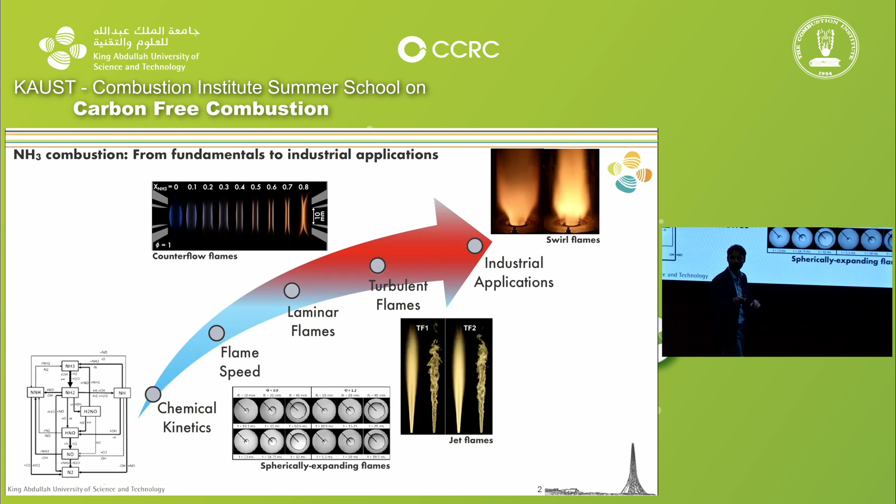I've chosen to separate this lecture into 2 parts. The first one is basically on how ammonia's chemistry influences the way the flame looks, because it is important, and also how it influences the tools we can use to study it.

I'll talk again about the species that are relevant to ammonia chemistry. Of course there will be some overlap with what has been told before. More details on the role of electronically excited species, and what are the challenges and opportunities for optical diagnostics.

And I'll give one example of a measurement campaign we've done at KAUST to reveal the potential of chemiluminescence, so flame spontaneous emission, to do flame sensing in the industry.

As a second part, I will talk about what I said before, all these canonical flames that we do in the labs to try to bridge the gap between very fundamental flame property and chemistry and practical applications.

First, I will show why laminar flame speed, laminar burning velocity — just different terms for the same thing — is not telling the whole story. It's very useful to know, but that's not enough.

And then I will list a few examples of these canonical burners, canonical flames that people have been studying to understand how we can then, in the future, do practical applications.

Moving on to the first step: what are the species relevant to ammonia chemistry? Just a quick reminder, because Professor Kobayashi talked about this, but in this presentation I will often start to talk about methane, which we use as a very simple reference fuel, to then compare with ammonia.

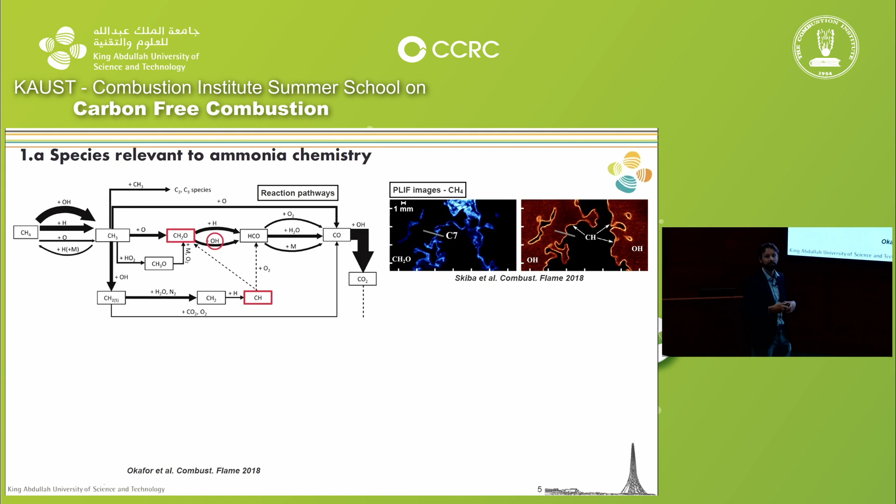If you mark where CH is, you get to know where the flame is actually burning. People have been using this in labs to try to study the instantaneous structure of turbulent flames, to understand turbulent flames. And if you use techniques such as planar laser-induced fluorescence, which Professor Aldén this afternoon I'm sure will talk a lot about, you can image instantaneously where these species are in the flame.

For example, we see that in blue here, we'll see where the layer of formaldehyde is. This is where the preheat zone of the flame is. In orange here, we will see where the CH is, which is the reaction zone. And in red, we have the OH. Sorry, I'm not able to show very well what I want to show because this is actually very inconvenient to use.

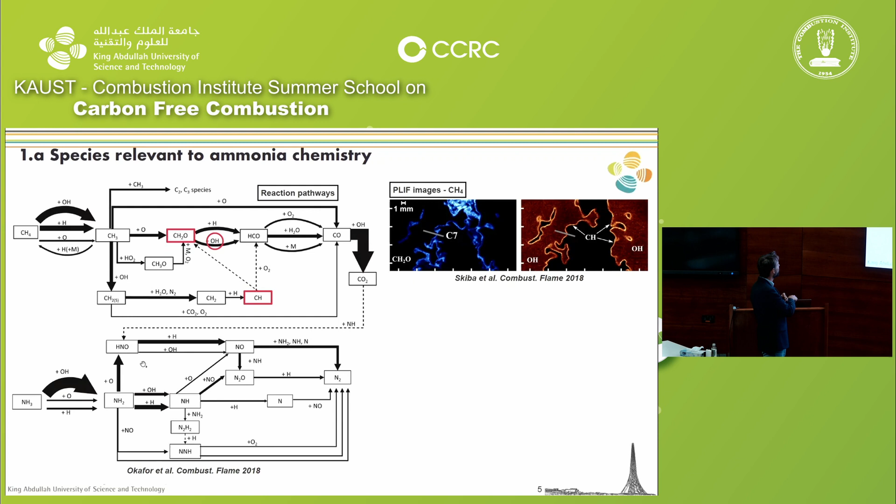But the issue is that with ammonia, it's totally different chemistry. If we look at the similar reaction pathway diagram for ammonia, we look at different species. Ammonia, as it starts to degrade, will form NH2, then NH, and then produce some NO, and with reaction with NO, also will go through to the final product N2. So now if we want to image the relevant species to look at the flame structure, we have to target different species. We can't target formaldehyde and CH anymore, they are just not present.

And so that's why we had to develop different techniques, still relying on fluorescence, but this time on different radicals, NO and NH, to study the instantaneous structure of these flames. So different chemistry not only controls how the flame burns, but it also controls what we have to do in the lab to understand these flames.

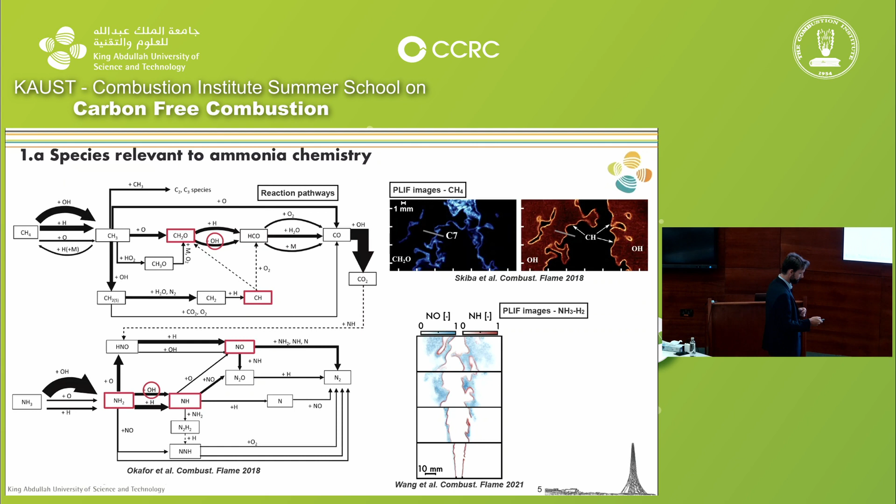Another way to look at the same thing is not using laser, just to look at the flame. I will illustrate this with a basic lab-scale swirl burner. This is a burner that you find in a lab, a few kilowatts, that starts to have a flow field and a complexity that mimics a gas turbine - turbulence and swirl. So this is just an example of such a burner.

And if you use it to stabilize a methane flame, typically you'll see blue flames. From left to right, you have different equivalence ratios, different air-fuel ratios. And at the bottom, you have what you'll see with an ammonia flame. These are real colors, you'll see exactly this with your eyes. And clearly, they look very different. One is blue, one is orange.

We know that these colors are the signature of electronically excited species - species that are at a level of excitation that they don't like. They want to go back to ground state, and to do this, they release photons, light, and this is what we see. Basically, if we have different colors, it means we have different electronically excited species, which means we have also different ground state species. This is just another way of showing that we have very different oxidation pathways between ammonia and methane flames.

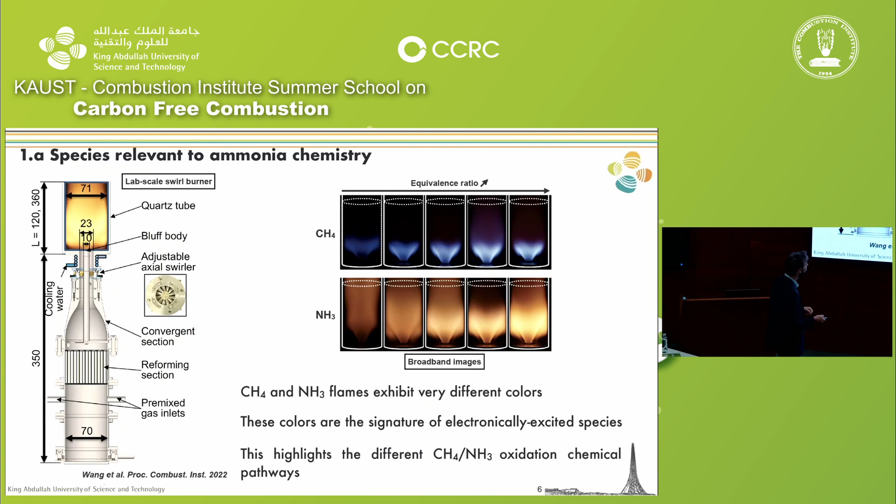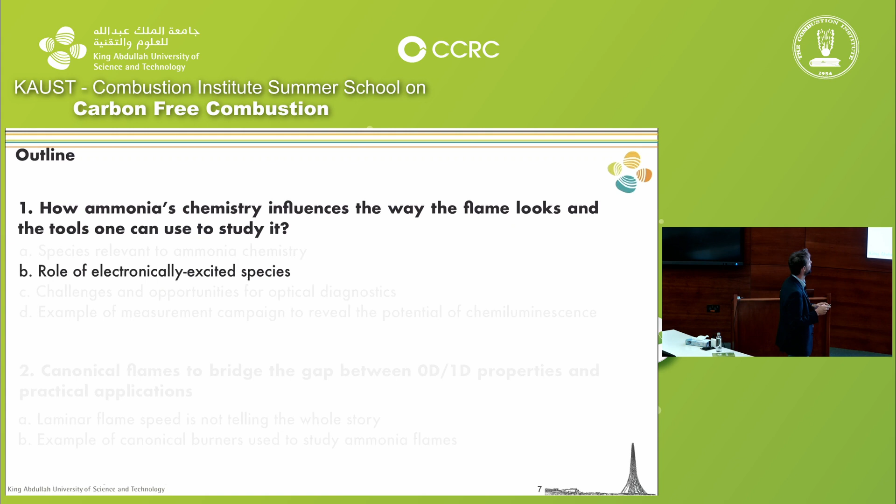And so this leads me to the next section about the role of electronically excited species. Professor Kobayashi started to talk about this, but for ammonia there's a lot of potential application from this. Again, let's go back to a reference flame.

So how can we explain this more carefully? People have been able to model the chemical reactions that explain how these excited species are produced and consumed. These are just examples. For OH star, there's a list of important reactions, and each is assigned three numbers, the Arrhenius coefficients used in this model to dictate the reaction rate as a function of temperature.

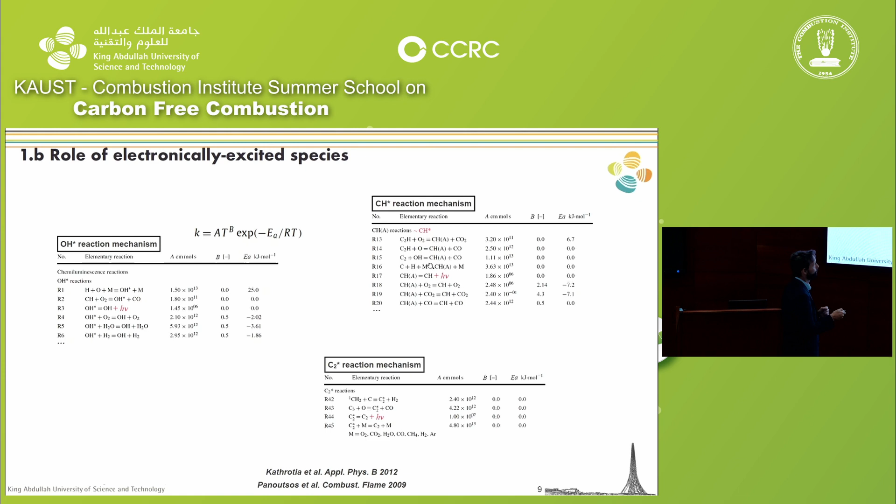So with a model like this, we can explain why we have OH star. But there's a similar model that explains why we have CH star, why the flame is blue, and why we have C2 star. These are just the basics, and this explains why the methane flame is blue.

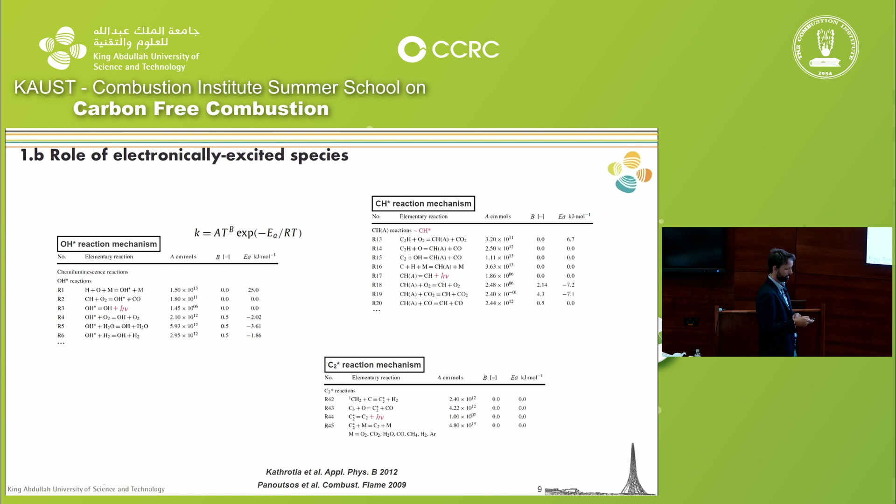I talk about all of this because the light signature of an ammonia flame is actually very rich. Many species contribute to it, and this is actually an asset - it's useful to know this, because if it's rich, it means there's a lot of chemical information coded into it. If you study this light well, you can infer a lot about the chemistry, basically do flame sensing. I'll explain how this can be useful, especially when dealing with complex blends like ammonia-methane or ammonia-hydrogen.

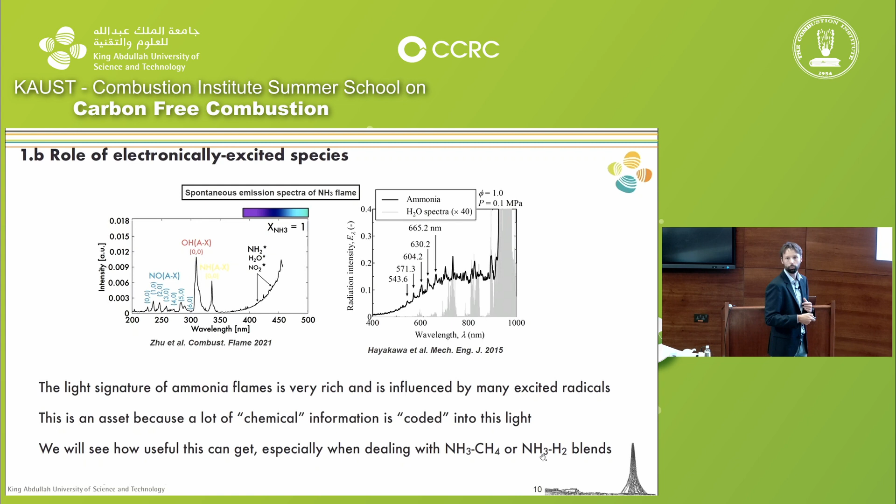So I've started to hint at an opportunity for optical diagnostics. I'll go into this section on challenges and opportunities for optical diagnostics. I think it will be okay for you to tell me why we care about flame luminosity - in an engine or gas turbine, we don't see the flame. Whatever color it is, blue, green, or yellow, what matters is that it burns and produces high enthalpy species.

What's nice about this is that recording the light from the flame is actually very cheap compared to other techniques, such as probes and lasers. And the data you get is quite easy to analyze. The only thing you need to potentially achieve this is some optical access to the flame, just a little hole in your combustion chamber. In labs, that's very easy to do. More complex in practical applications, but it can be done as well.

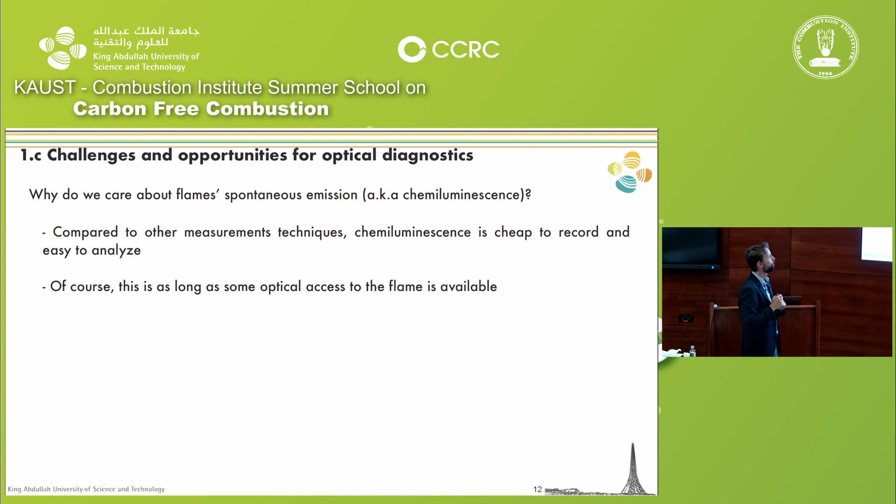So what can we specifically learn from this chemiluminescence, except just saying this is blue or green or orange? To illustrate this, I will use a very simple domestic example. Again, not talking about ammonia for now, but natural gas.

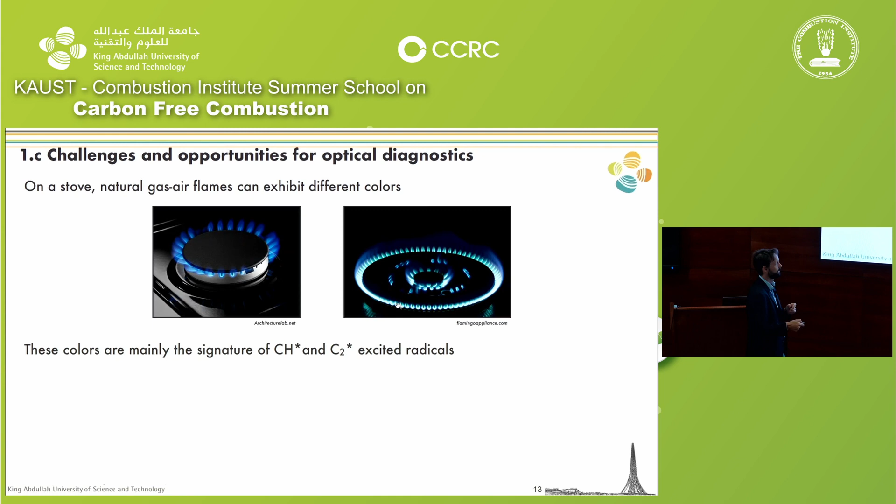Before we all had electrical stoves, we had stoves fueled by gas, potentially natural gas, propane, or butane. If you've seen these kinds of systems before, normally if the system is well set up, you'll see some kind of dark blue flame. But if your system is not well set up, you might be seeing a flame that is lighter in color with a hint of green.

So someone who knows about this, a stove technician, just by looking at the flame can tell you this flame has fuel in excess, you don't want that. Potentially you're wasting fuel, but more importantly, you might be producing carbon monoxide. You don't have enough oxygen to fully oxidize your fuel, so you get CO instead of CO2, and we all know that CO, carbon monoxide, is toxic.

So this is really just a basic domestic example, but you can think that this can be applied to practical devices as well. If you learn from the flame what the color means, you can know if your flame is what you want or not.

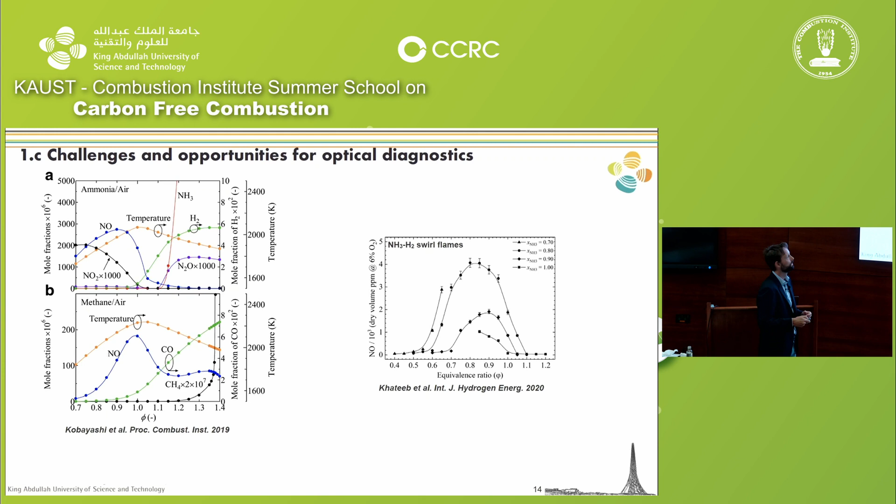But knowing exactly what's the fuel that is burning is also important. You see in a graph like this, measurements of the NO concentration in the exhaust in thousands of ppm as a function of equivalence ratio. But you have different curves here, different symbols, because there are different compositions of the ammonia-hydrogen blend. And we see clearly that changing the composition, even though you're always using ammonia and hydrogen, has a huge impact on the amount of NOx you're producing.

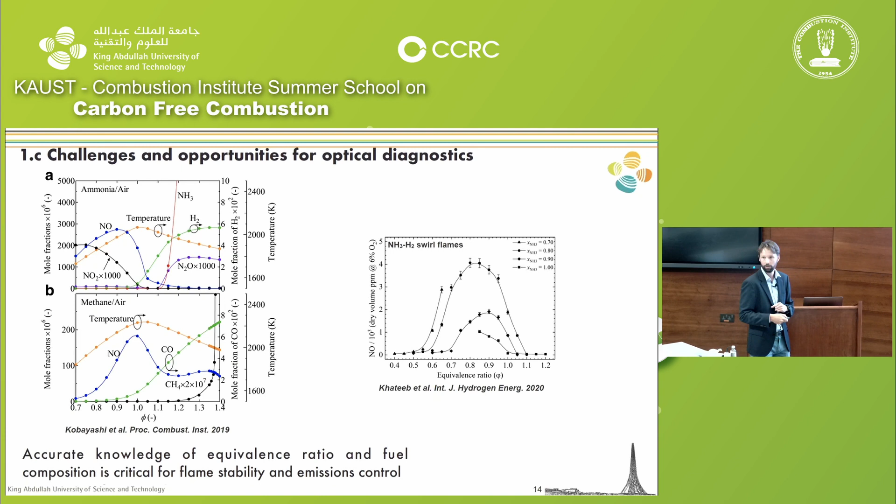So the key of this slide is saying: accurate knowledge of the equivalence ratio and the fuel composition is critical for emission control. And I haven't talked about this, but clearly also for flame stability. So these things are important.

And again, you may be able to ask me, okay, but isn't the operator of the gas turbine or the engine choosing the amount of air he or she sends and the amount of fuel? So aren't composition and fuel-air ratio prescribed and known? Okay, why do we care about this? It's actually because we don't really always know exactly what's burning and how it's burning.

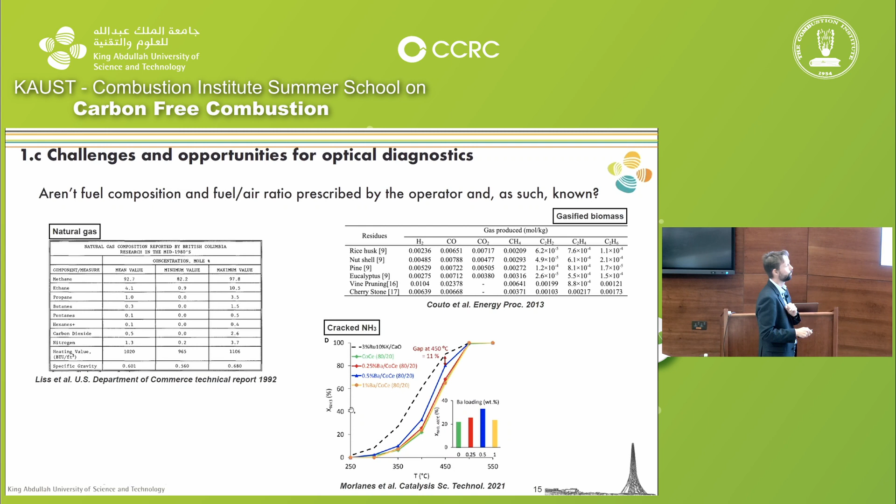A curve like this shows you the cracking percentage of ammonia. So 0 means you've cracked nothing, 100 means it's all converted to hydrogen and nitrogen, as a function of the temperature of your catalyst bed. Different colors mean different catalyst compositions, but that's not very important here. And this curve is so steep that it basically shows that if you don't control exactly the temperature of your catalyst bed within a few degrees, you might have very large variations of the composition of your exhaust gases of the cracker, which is then sent to the gas turbine.

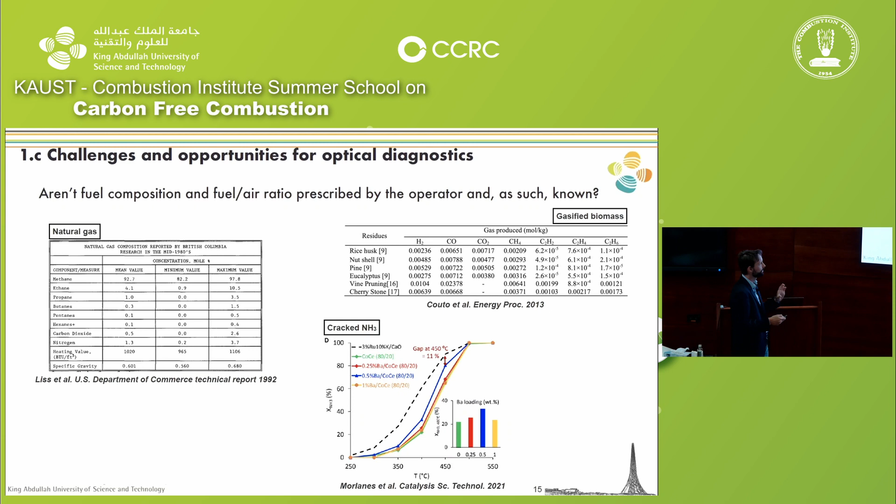Okay, so again, just examples to show that as an operator, we don't always know exactly what we are fueling the turbine or engine with. So temporal variations of fuel composition are to be expected. This was for the fuel composition. What about the fuel-air ratio?

I will illustrate this with the schematic of a powertrain of a micro gas turbine, this one from Ansaldo. I guess those of you who did the lab tour yesterday have actually seen this turbine. So the heart of the unit is the combustion chamber, producing hot products that are expanded into a turbine, creating rotation of a shaft connected to a generator that produces electricity. But in addition, on the shaft there is also a compressor that sucks in air from the room, compresses it, and sends it to the combustor.

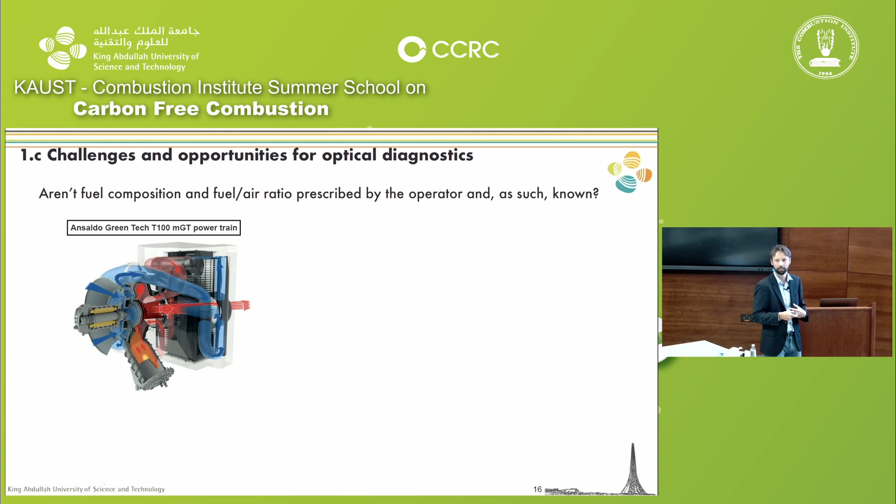Okay, so the key here is that we don't have a mass flow controller where we push a button and say, I want 10 kilograms of air per second. It's kind of passively driven by the speed of the shaft, and it changes with time depending on how the turbine is operating. And it gets worse than this.

Once the compressed air goes to the combustor, this is a schematic of the combustor, it comes from the top here, and not all of it goes into the injection, into the flame. Some of it goes into these dilution holes that are here to make sure that the hot products from the flame are cooled down before they reach the turbine. Otherwise it's too hot and you damage the turbine, right? And here again, we don't have mass flow controllers that set the flow. We just have holes, so it's all passively driven using pressure drops.

It's okay, it's the same, we don't really know exactly what's going to happen. Even worse, once all this air reaches the injector section, some of it goes into a small pilot flame that burns in diffusion mode. Some of it finally gets mixed with the fuel, but we keep some pure air to inject at the very last moment. That's a protection mechanism because we want to make sure it's not flammable until we want it to be flammable. This is a flashback protection mechanism.

When we do this, we really mix all the fuel and air at the very last moment, and we're not sure it's fully premixed. So you might have spatial variation of fuel-air ratio, equivalence ratio, in your combustor. Again, we don't really know exactly what's burning and how it's burning. This is why I'm talking about these flame colors, because by looking at them, we get to know potentially what's burning and how it's burning.

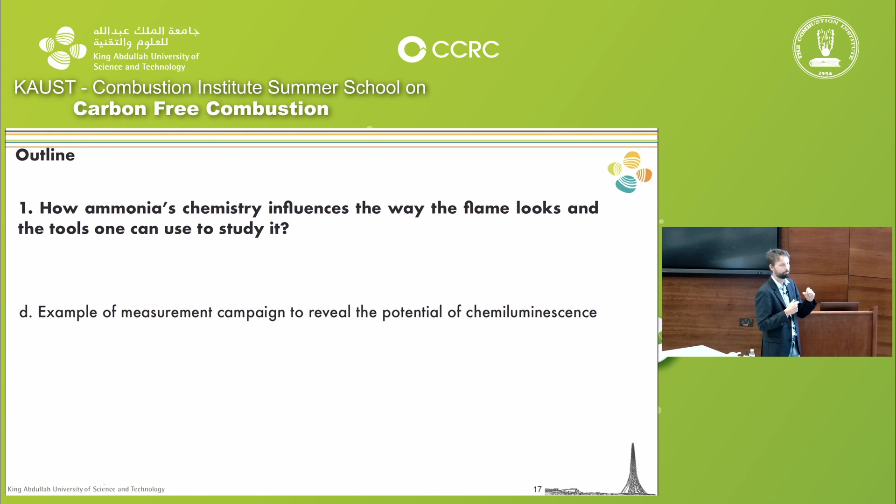This allows me to move to the next section, about an example of a measurement campaign we've done at KAUST to reveal the potential of this chemiluminescence, these flame colors, specifically when there is ammonia in the flame.

The objectives were simple. We wanted to measure the largest possible database of flame luminosity for ammonia-methane flames. We did also ammonia-hydrogen, but today I'll talk only about ammonia-methane. Then we use this database to try and understand how these chemiluminescence intensities, these colors, can be surrogates of important flame properties we want to know, such as fuel composition and equivalence ratio.

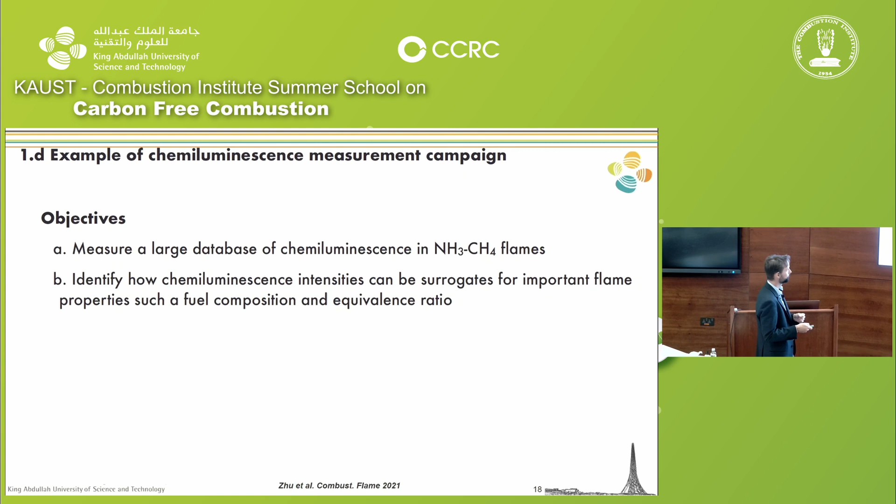For that, we've used a very basic burner mentioned this morning, a counterflow burner. That's a very specific burner in the lab, basically two nozzles facing each other, identical, feeding the same mixture. A ready-to-burn mixture of methane, ammonia, and air is sent to two injectors facing each other, so you get a stagnation plane in the middle, and on each side you get two identical flames, we call them twin flames. What's nice about this burner is that the flames are very flat, which makes them very easy to study and to model.

The small deviation we did from the standard burner is that we pierced a hole at the bottom, so that the light emitted by the flame could escape, be focused on an optical fiber with a parabolic mirror, and then sent to a spectrometer so we can analyze the light distribution from the flame.

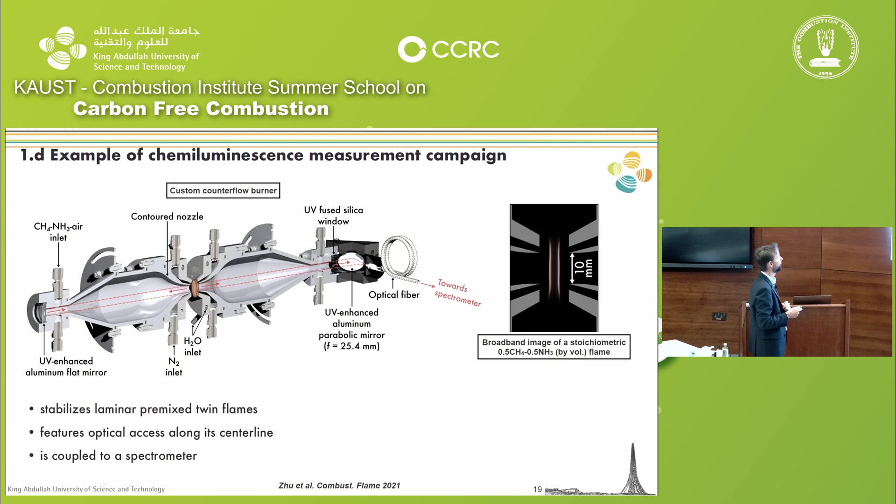We did this exercise for as many flames as we could. This image shows that we varied the fuel composition. The one on the left is pure methane, it's blue. The one on the right is almost pure ammonia, it's orange. You have this whole rainbow of colors in between. These are real colors. We were surprised at the beginning, but other people have seen the exact same thing.

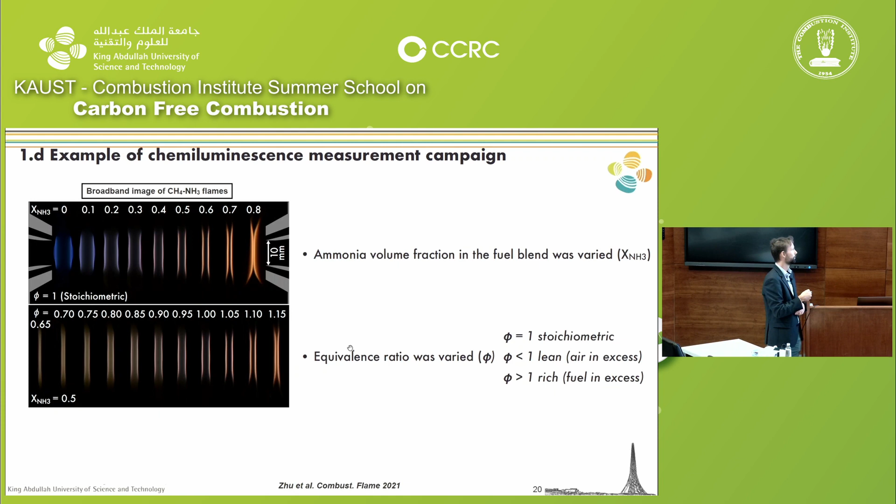We can also, for a fixed fuel composition, vary the equivalence ratio, the fuel-air ratio. We observe that this also changes the flame color and the flame intensity.

For each of these flames, we have a spectrum which we can analyze. I've shown this one or an equivalent before. This is the one for pure methane, with contributions from OH star and CH star. The one for ammonia, also shown, has contributions from OH star, NO star, NH star, and these broadband contributions.

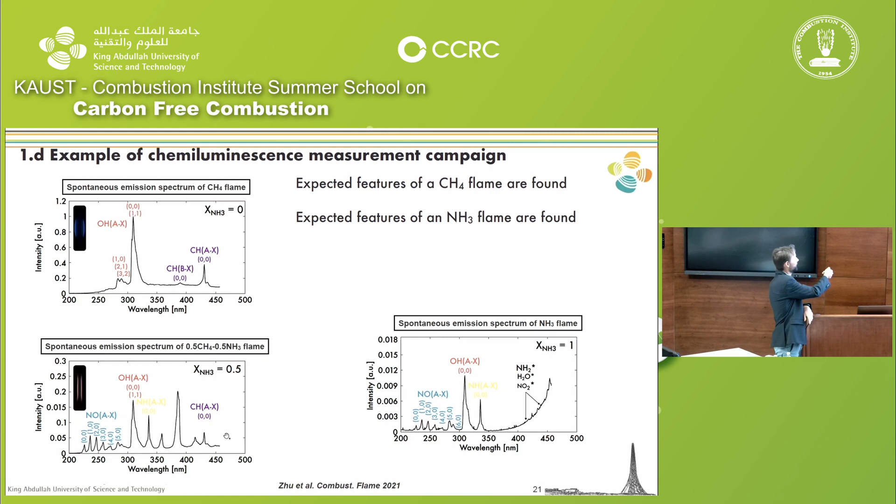Where it gets interesting is when you mix ammonia and methane. As expected, you see some OH star, because it was there for both ammonia and methane. You see some CH star, NH star, and NO star, that's expected. But we do find some peaks that we did not find before. By doing some literature review, we were able to attribute them to the excited species CN star.

Why is this important? It highlights that there are basically synergies between the reaction mechanisms, some cross-contamination. You can't get CN star if you have only methane or only ammonia—you get it only if you mix them together. So this shows that these reaction mechanisms don't work in isolation; sometimes they communicate. This is just highlighted here with an electronically excited species, but if this is true for an electronically excited species, it's also true for the ground state species.

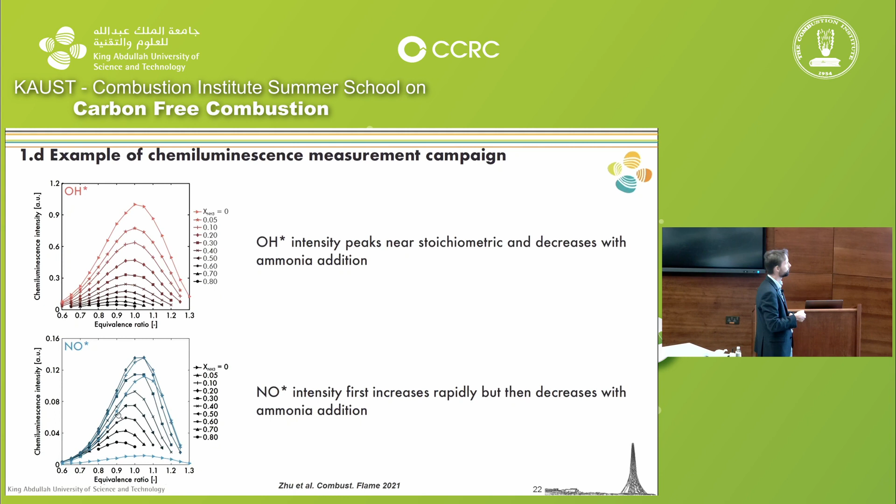Clearly, the more ammonia you put, the less OH star you get. What's nice is that when you look at the same graph but for NO star, we get a very different trend. Starting from pure methane, there's almost no NO star; you put a little bit of ammonia, and NO star explodes. Then if you put too much ammonia, NO star decreases. So we have different trends for these radicals.

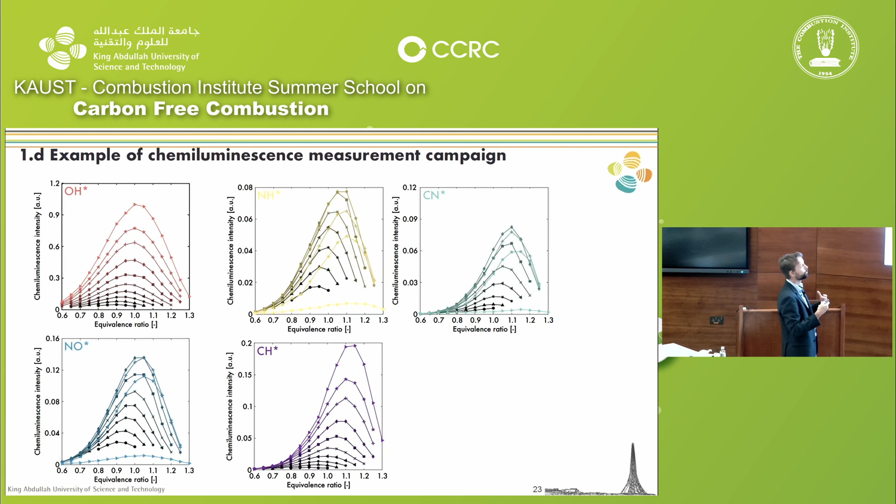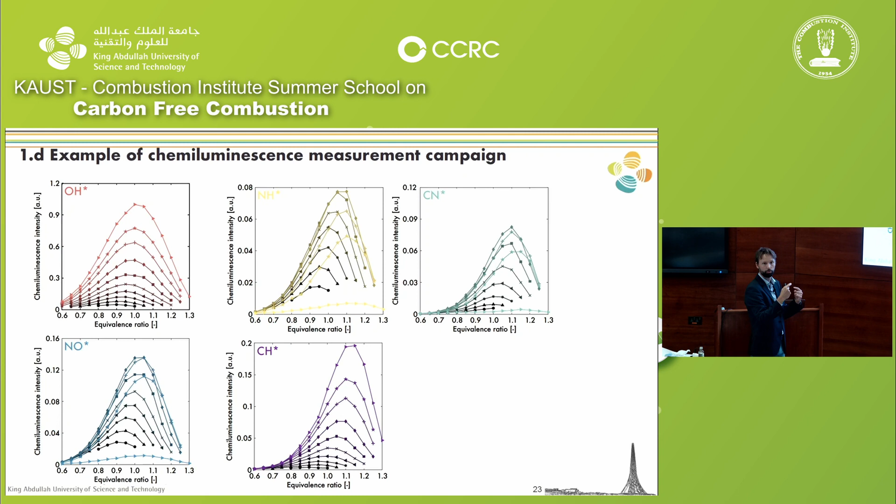And if we look at all the radicals we have access to, they all have different trends. Again, this is very useful, because if they all behave differently and we record them, there's probably enough information in there to predict, to recover what was actually burning.

Except that now we have 5 inputs, these 5 radicals, and there are 2 quantities we care about: we want to predict the composition of the fuel and the equivalence ratio. So this might be quite complex and nonlinear relationships. This is where machine learning regression algorithms can help us uncover these complex and hidden relationships.

So we have this database. In this case, we had 214 flames, and we chose to put 75% aside to train our algorithm, and 25% aside for future validation.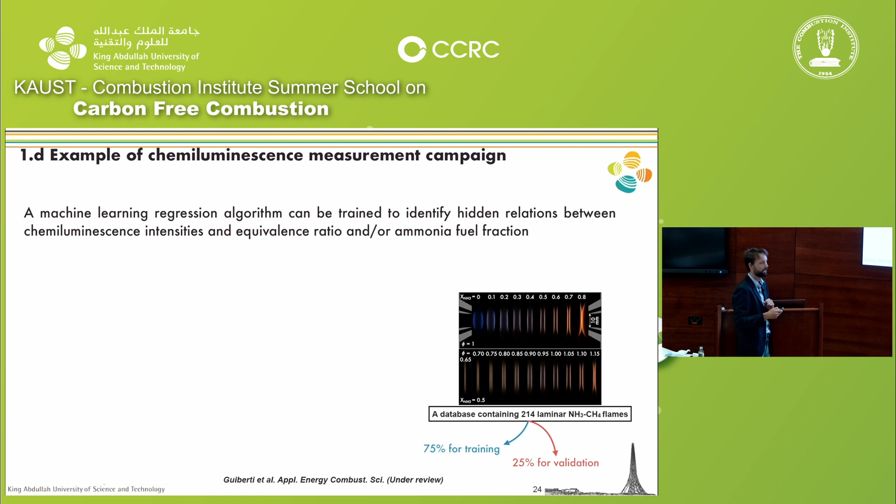So we have this algorithm that injects as input all the different colors from the flame, as well as the equivalence ratio and the ammonia fraction. You want to train it to predict what was the equivalence ratio and the ammonia fraction just by using the different colors from the flame.

If we look first only at the blue points, these are the points for the training data, we show that we are successful on collapsing on this unity slope line. So the algorithm was able to recover what was burning.

But what's nice is that when we now use the 25% of the data that was not used for training, these are the red points, we also fall on this line. So the predictions were successful, which means physically that there's enough information in the light that the flame sends to really predict exactly what's burning in terms of fuel composition and equivalence ratio.

And that's the foundation to be able to say that we can probably use this to do flame sensors in engines or gas turbines. We can do this because this light signature is so complex.

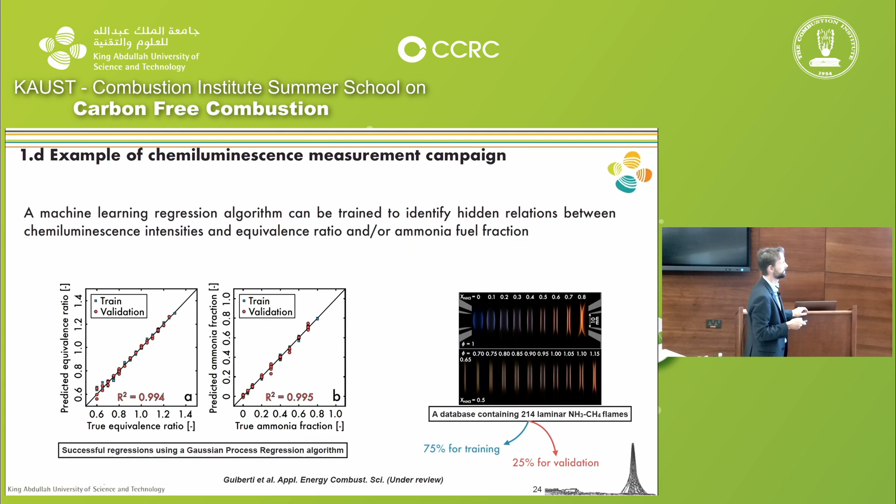The issue here is that we've only done this for these laminar flames, which are very different from what you'll find in an engine or in a gas turbine. And as very often when you do machine learning, you always ask yourself, can this be generalized for other conditions? And other conditions in this context means more practical flames.

So to challenge this, we've done different flames, this time turbulent swirl flames, not quite a gas turbine already, but something that mimics quite well the flow of a gas turbine. That's an example of the flame. So we did, again, methane ammonia.

The other deviation we did from the laminar flame study is that this time we used a bench spectrometer, a much cheaper and easier to use spectrometer compared to the scientific grade spectrometer, with the assumption that maybe in the field, in industry, they would use bench spectrometers instead of scientific spectrometers.

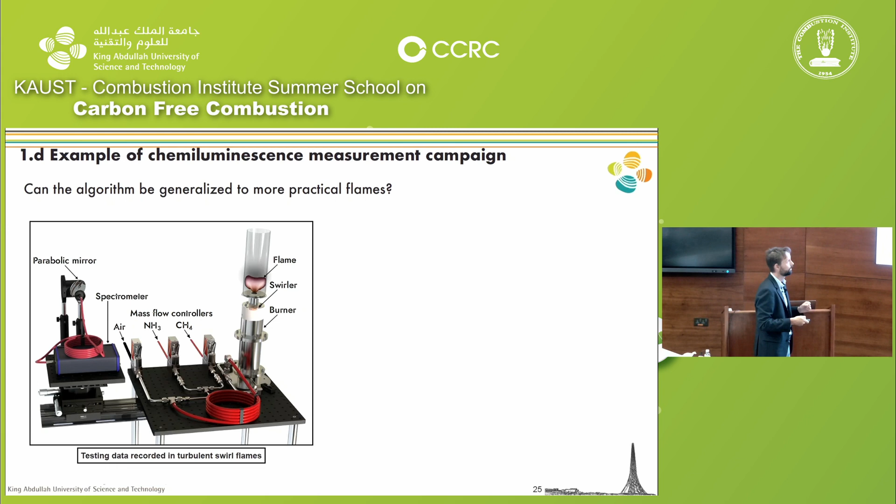We recorded all of this data, and then we sent as inputs the light emitted from the flame into our machine learning algorithm, not telling the algorithm, of course, what was the equivalence ratio and what was the ammonia fraction.

And we found these green symbols, for these swirl flames, that again match very well this unity slope curve. So we were able to predict the equivalence ratio and the ammonia fraction in these gas turbine-like flames with an algorithm that was only trained with laminar flames.

So the story stops here, but it basically shows that there should be enough physics to develop these flame sensors.

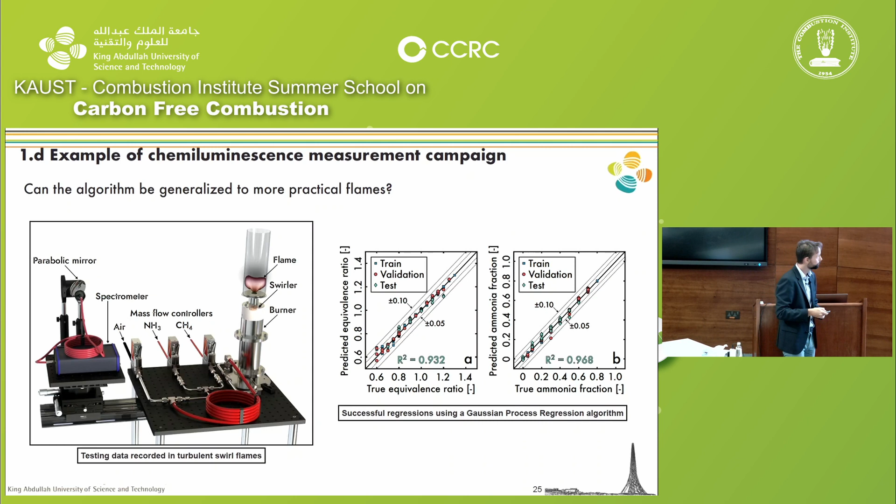So this was basically an opportunity for optical diagnostics thanks to ammonia, but I haven't talked about the challenges yet, so I'll backtrack a little bit and talk about some challenges.

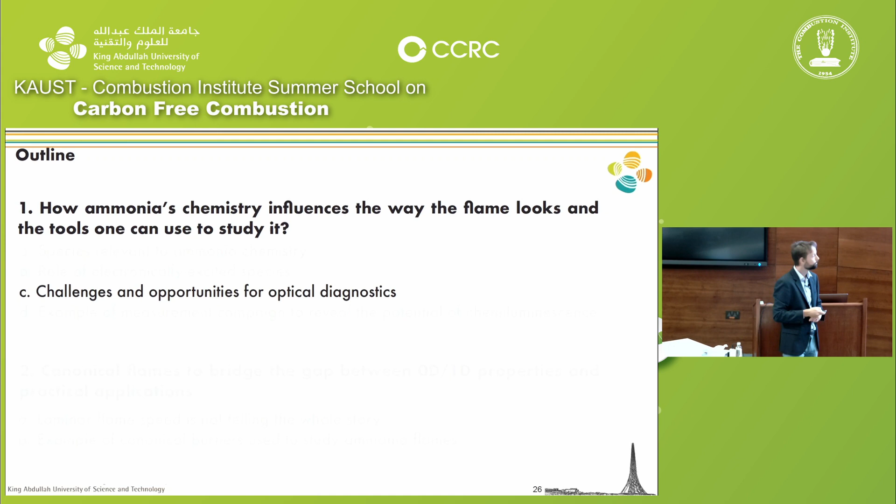If you want to image in a lab the structure of a turbulent methane flame, it's useful to image formaldehyde, OH, and/or CH. Unfortunately, you can't use these same species in an ammonia flame because, except for OH, they're just not present. So instead you might target NH2, NH, and OH or NO because they have similar behavior. When you do this imaging, you have to choose lasers tuned specifically for each species, so if you have different species, you have to go back to the drawing board and figure out new lasers or excitation strategies.

This is what I'll talk about briefly, since I'm sure there will be much more this afternoon. This is a schematic of the experimental setup we used to do NO-NH laser-induced fluorescence. You have an ammonia flame here, in a big high-pressure combustion duct, because we cared for this study about elevated pressure flames.

You saw this in the lab yesterday. So what we do is shoot two different lasers into this flame, both in the UV, one at 236 nanometers and one at 303. One targets NO, the other targets NH. Why? Because if you want to excite the species to generate the fluorescent signal you record with the camera to measure your species, you need to make sure the species accepts this wavelength—it's tuned to this wavelength, and that's what this diagram shows.

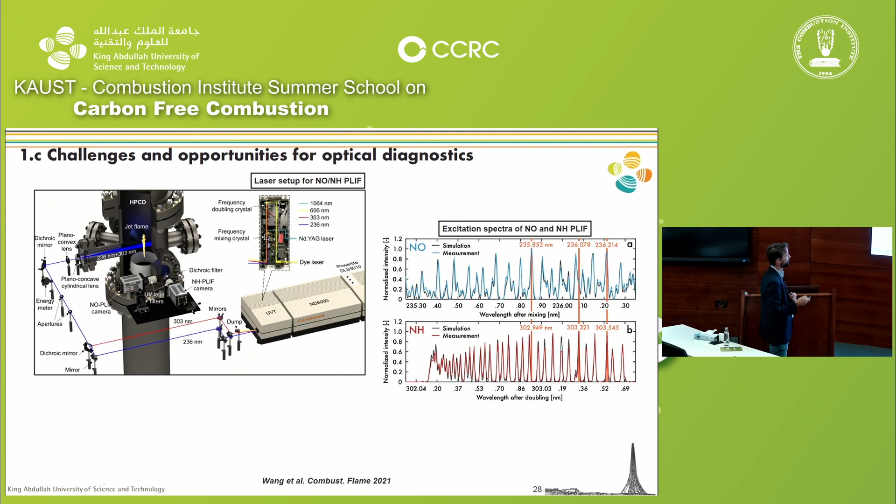Again, I'll be brief since this will be covered this afternoon. This is what Professor Aldén developed at the University of Lund—being able to image NH2 as well. This illustrates that if you want to excite NH2, there are only specific wavelengths you can use to do it efficiently. They had to use very specific laser technology to access this wavelength, 385, with the right energy levels, and they were able to prove you can image the location of NH2 in these flames.

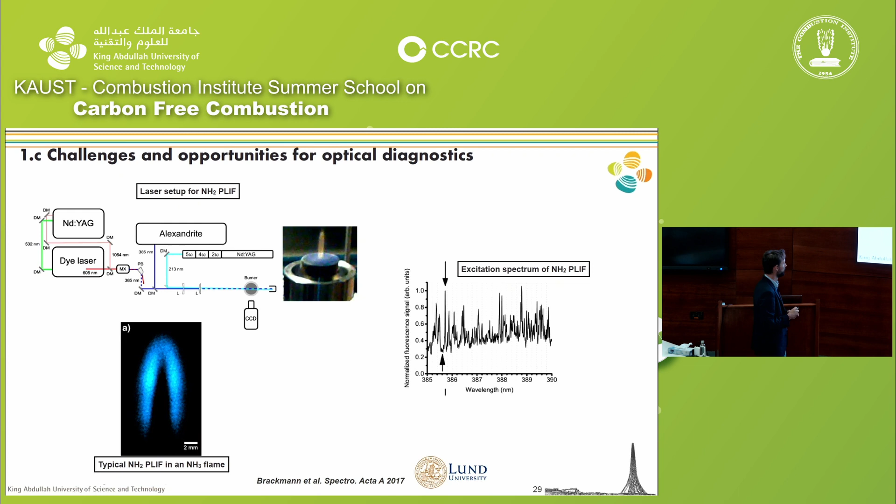All right, so I'll stop here with part one and move on to part two, which is somewhat disconnected. This is about canonical flames that people have used in the lab to try to bridge the gap between what's very fundamental but useful, and the other end of the spectrum with practical applications. There's a lot of limbo in between where we need to work a lot.

I'll illustrate why we need to work a lot on this, starting with why just knowing the laminar flame speed is not enough. There's a very nice study done at NTNU in Norway that illustrates exactly this, which I'm going to talk about. My point is that knowing the laminar burning velocity is not sufficient if you want to predict the behavior of the flame in a practical combustion device.

Among other things, one reason for this is turbulence—the effect of turbulence. The laminar burning velocity doesn't take this into account. They showed this very nicely using a burner, which was very simple.

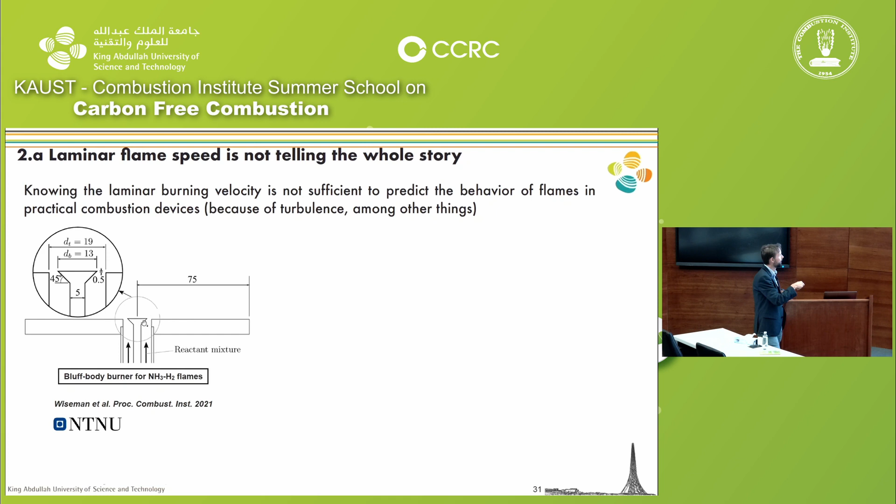And before the injection, it meets this shape here, this bluff body. And this induces a recirculation zone so that the flame is stabilized like this. So on the side here you have the flame front, and in the center a hot recirculation of burn product. This is very useful because you keep sending back to the incoming reactants hot products, so this is a continuous ignition source.

And in an instantaneous fashion, this is what it looks like. You really see that this is a turbulent flame with some corrugation and some potentially localized extinction.

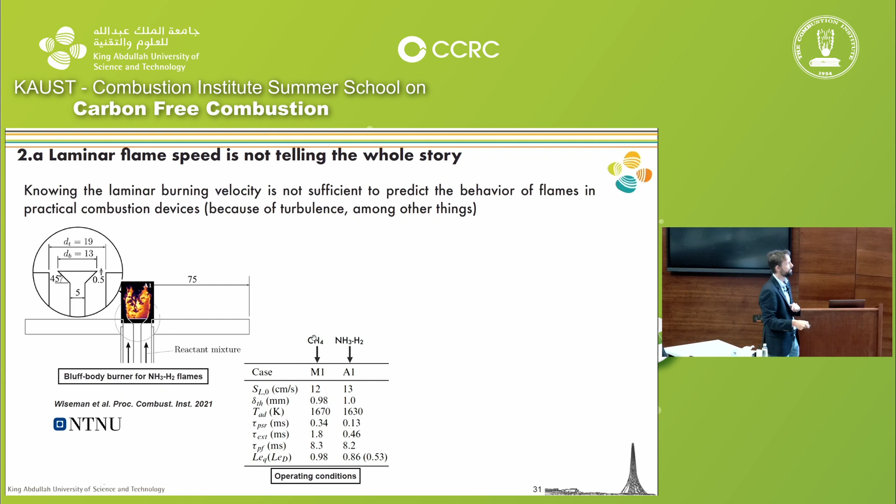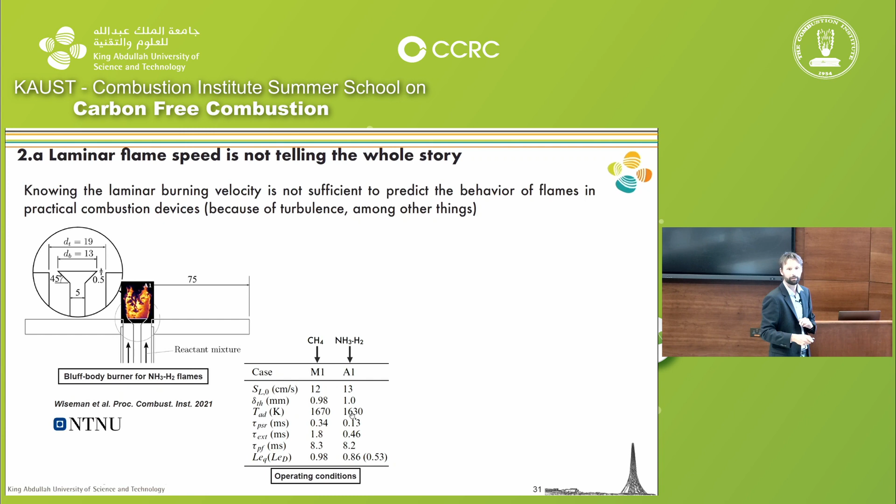So what they've done with this burner that was very clever is that they chose two flames, M1, M refers to methane, and A1, which is an ammonia hydrogen air flame. But they tuned the composition and the equivalence ratio so that they have almost the exact same laminar burning velocity, thermal flame thickness, and adiabatic flame temperature. So in terms of laminar properties, these two flames should be identical.

And then they challenged this in the turbulent burner, and so they looked at lean blowout limits. They started with these flames, which are both—so let's ignore all the points except M1 and A1. Both are 0.6 equivalence ratio, and if you start with very low velocity in your burner, you have a stable flame. You progressively increase the velocity up until the point the flame can't take it anymore and extinguishes. This occurred at around 10 meters per second for the M1 flame.

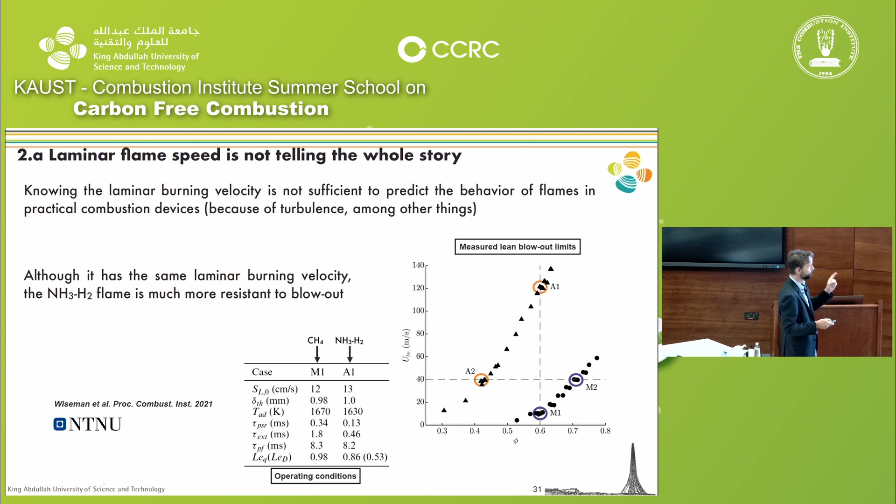And what they've noticed is that if they do a similar exercise with the A1 flame, they could pass much, much larger velocities, up until 120 meters per second. So although these flames from the laminar point of view are the same, one of them, the ammonia hydrogen flame, is much more resistant to blowout. That's a clear indication that even if you know your laminar burning velocity, this is not enough to predict what's going to happen in an actual practical burner. I will explain to you later with a different study why this happens.

And so now we'll go through different studies made in different parts of the world, showing how people can specifically choose a physics they care about, study it with a very carefully selected burner, so that in the end, by adding all of this together, we can potentially do practical devices.

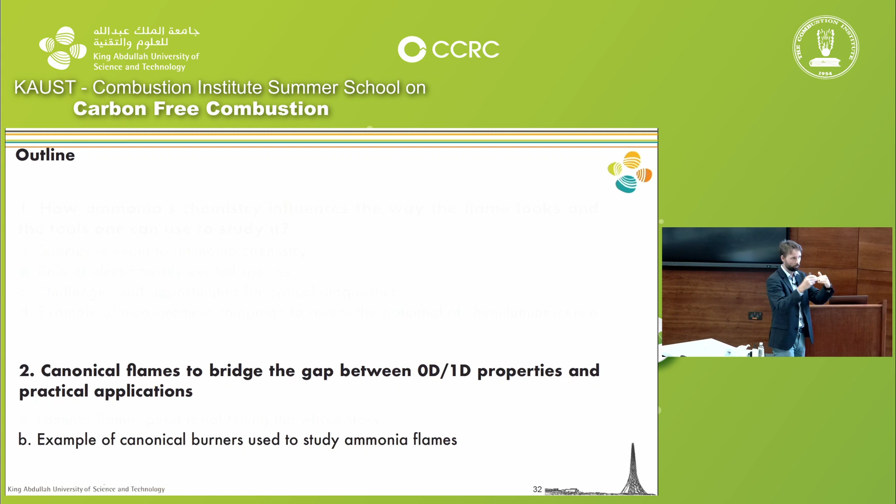So clearly, there's a need to study flames for more realistic operating conditions. What I mean by this is higher turbulence levels and also elevated pressure. Most practical applications operate at elevated pressure.

But we want the flames that we choose to study to remain sufficiently simple so that the flame physics we care about, at least we have a chance to look at it and understand it, right? You can't work directly in a gas turbine, that's too complex. And that's why people spend a lot of time choosing specific burners that are purposely built to every time isolate a specific physics.

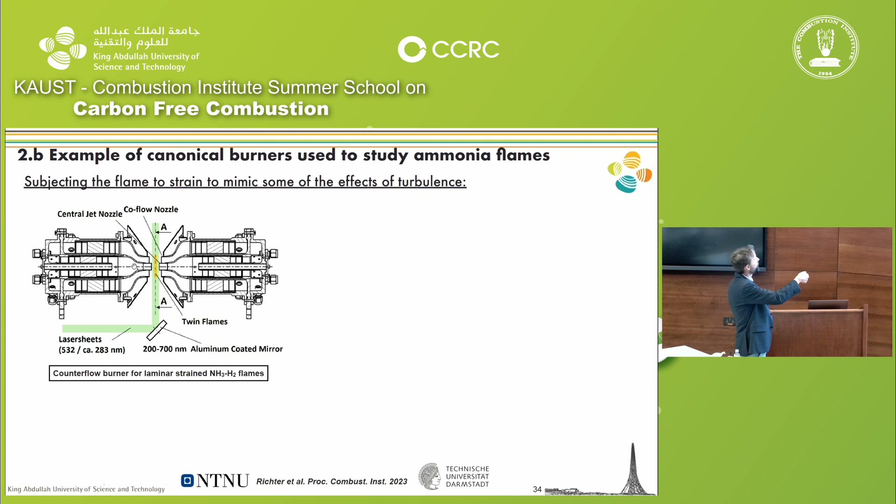And the first study I want to talk about comes from a collaboration from NTNU and TU Darmstadt in Germany. And they've used again one of these canonical counterflow burners, similar to the one I've talked about before. You have two nozzles facing each other, supplying the same ready-to-burn mixture of ammonia and hydrogen in this case, and you get these very nice twin flames in between.

And so they did this because they wanted to subject the flame to strain in order to mimic some of the effect of turbulence without having all the complexity of turbulence as a first step. So what they did is that they progressively increased the velocity in these nozzles. This is what you get from left to right, which basically increased the strain in these flames. I will explain what strain is.

And you see that these flames are getting closer and closer together. So from a schematic point of view, if you have your two nozzles here and here, you have the stagnation plane in between and a flame on each side. These arrows are the streamlines. Because there's this stagnation plane, the gas you send has to deviate and escape at some point. And as you increase the velocity in the jet, these streamlines deviate faster and faster, and you're actually increasing the strain.

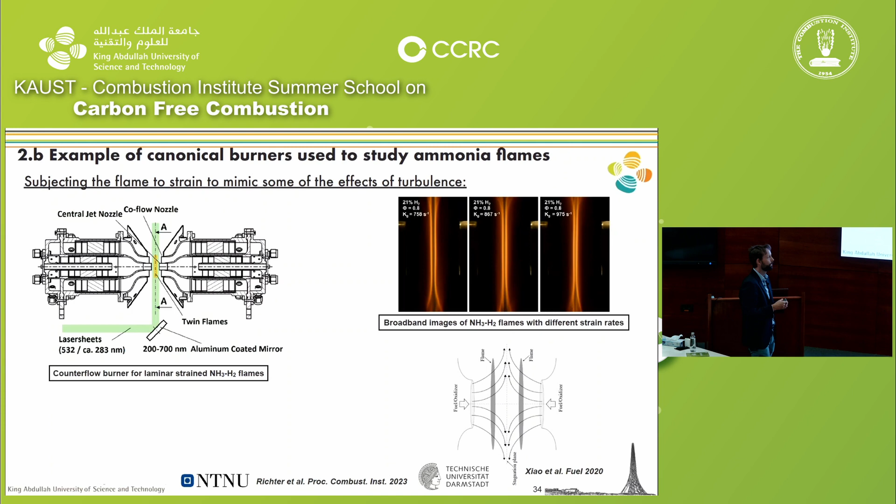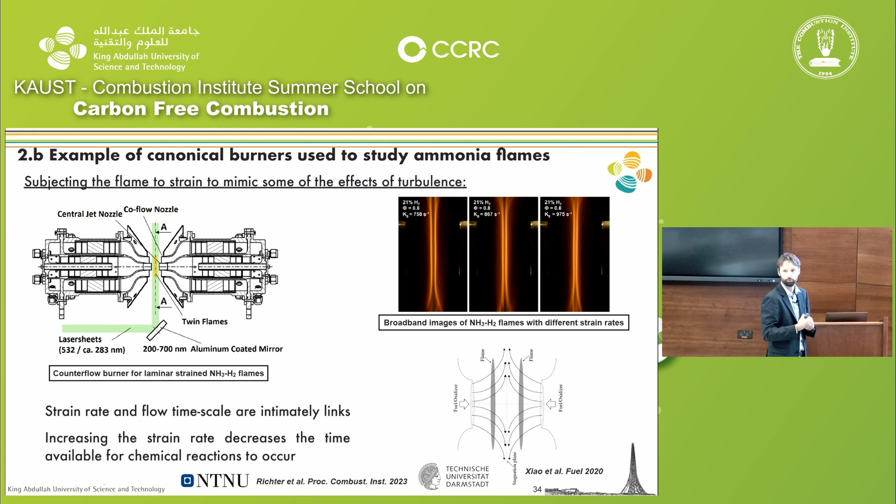The strain is very connected to the flow timescale. Increasing the strain actually decreases the flow timescale, which decreases the time available for chemical reactions to occur. You're kind of pulling the reactants apart, and they may not have enough time to react.

Strain mimics somewhat some of the effects of turbulence, because turbulence creates these turbulent eddies, little vortices, that separate the reactants. They create this mess where reactants move away too fast and may not have enough time to react. This is what you do when you strain the flame.

They clearly show that a methane flame doesn't like to be strained compared to an ammonia hydrogen flame. This is why the lean blow-off limit for an ammonia-hydrogen flame was much larger than a methane flame, as shown before in the other study from NTNU.

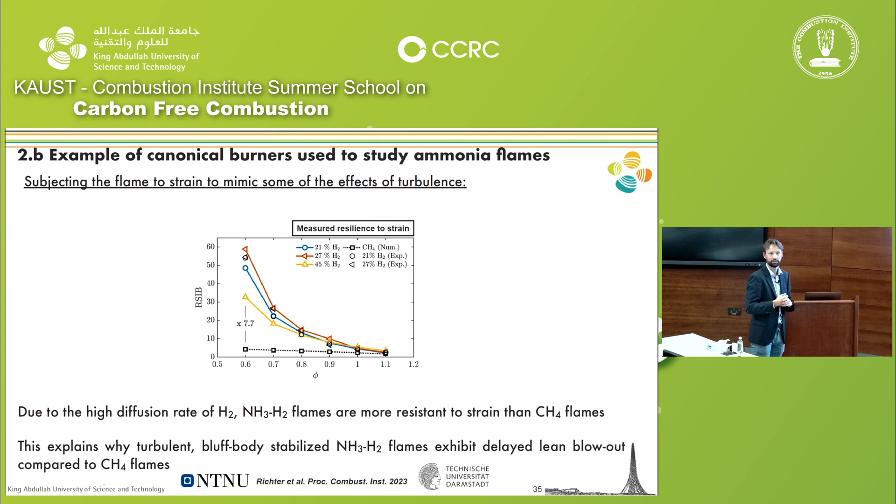Physically speaking, why is that? It's because of the presence of hydrogen in the blend. Hydrogen is so light that it diffuses everywhere very quickly, so it always goes where it's needed. This helps the chemical reactions occur in due time, even if they don't have a lot of time to occur.

So this was one example. Now I want to talk about another example, about the effects of the stoichiometric mixture fraction on the behavior of jet flames. So what's the stoichiometric mixture fraction? First, what's the mixture fraction?

The mixture fraction is the ratio of the mass of fuel you have to the mass of oxidizer, at a specific time and location. The stoichiometric mixture fraction is this ratio when it is stoichiometric, the right amount of both reactants.

I want to see the effect of this in turbulent jet flames. Turbulent jet flames are very useful in the lab because they are very nice canonical objects that we can study. But they also have practical applications in furnaces, ovens, or flares, for example.

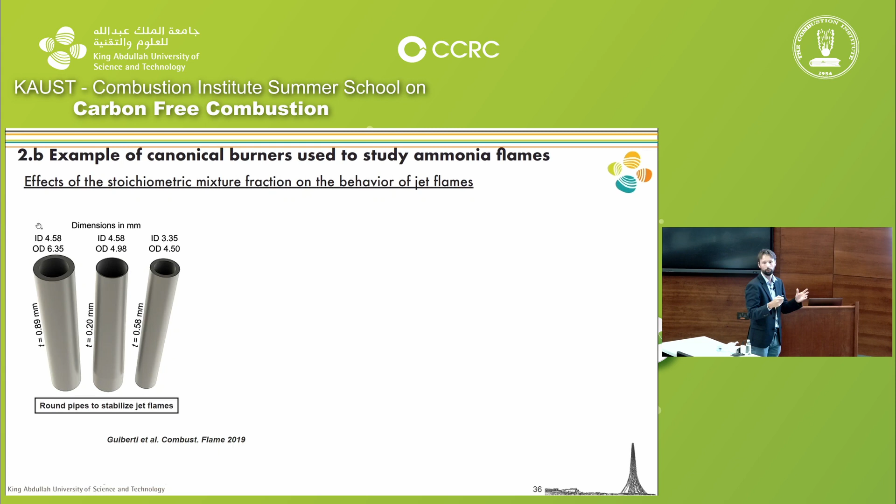In labs, at least, we typically get these flames using very simple round tubes like this. These are just 3 examples. We'll have high-velocity fuel flowing in the center and being injected into an environment with oxidizer, potentially quiescent or low-velocity air, for example. These are examples of turbulent jet flames.

We can image this with laser diagnostics. You have 4 images here, 4 different realizations of the same thing in this lifted methane flame. The different colors are different scalars, metrics that we measured. The red is OH, which we measured with OH PLIF, and it basically shows you where the flame is.

You see these tongues here, these red things, that show the edge of the flame, the most upstream location of the flame, floating in the field. Around the red, you see this black - that's the formaldehyde.

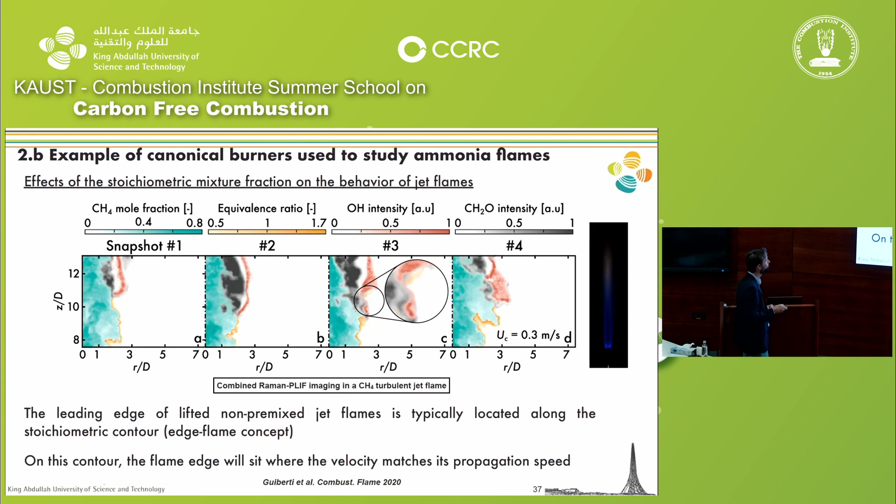So why do we care? This is a schematic I borrowed from a study from the group of Professor Kobayashi, where you have a fast jet of fuel, a slower air stream, separated by the nozzle. The blue lines are the streamlines, and the black and red lines are the stoichiometric contours, one for methane and one for ammonia-methane. E equals 0.3 refers to the fact that 30% of the calorific input of the blend comes from ammonia - that's one way to define the blend. That's why you have 0 here, there's no ammonia.

Clearly what strikes here is that these two lines are not at the same location. Why are they not at the same location? You can understand this by looking at the global combustion reaction when it's stoichiometric.

You've seen these equations already this morning. The one for methane tells you that if you take the mass ratio of methane to oxygen, you get a stoichiometric mixture fraction of 0.2. If you do the same exercise for ammonia, you get that relatively speaking, you need more fuel in mass compared to methane.

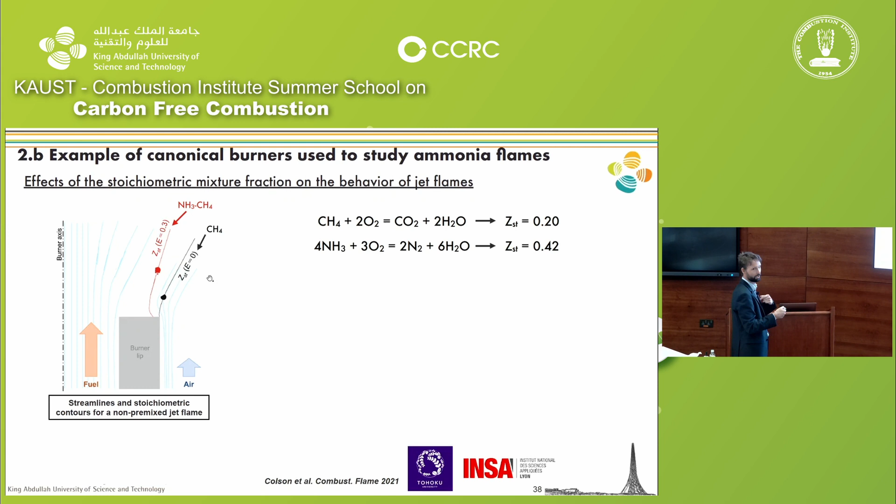And this explains why this red curve is on the left - because you have this mixing layer with pure fuel on one side, pure air on the other. If you need relatively more fuel, you need to go towards the jet of fuel. And we see that because the fuel is typically faster in these applications, as you go closer to the fuel you find higher velocities, and this has a tendency to push the flame downstream.

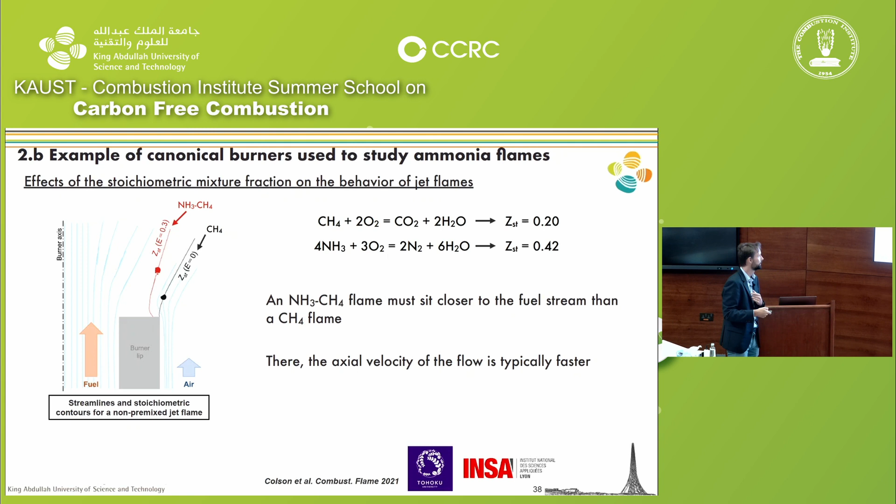These researchers in Sendai actually measured that. They measured this standoff distance, dA, and plotted it as a function of the different compositions in the blend. From blue to yellow, you get more and more ammonia, and clearly we see that the flame gets further and further away from the nozzle.

And why is it important? It's because of temperature. They also measured the temperature at the tip of this nozzle, and saw that as they switched progressively to ammonia, the flame gets further away, which means the nozzle gets colder and colder. This is just a canonical study, but it's important for practical applications because if you design a burner for methane and then change the fuel, the flame might displace a little bit, and you may get a different temperature at the nozzle.

Here it's colder, but it could be hotter. And of course, it might damage your unit if you haven't planned for the flame getting closer and the nozzle getting hotter. So this is, again, one example of a very canonical lab-scale study that's useful for us to understand what happens on a fundamental level and to develop predictive models for practical applications.

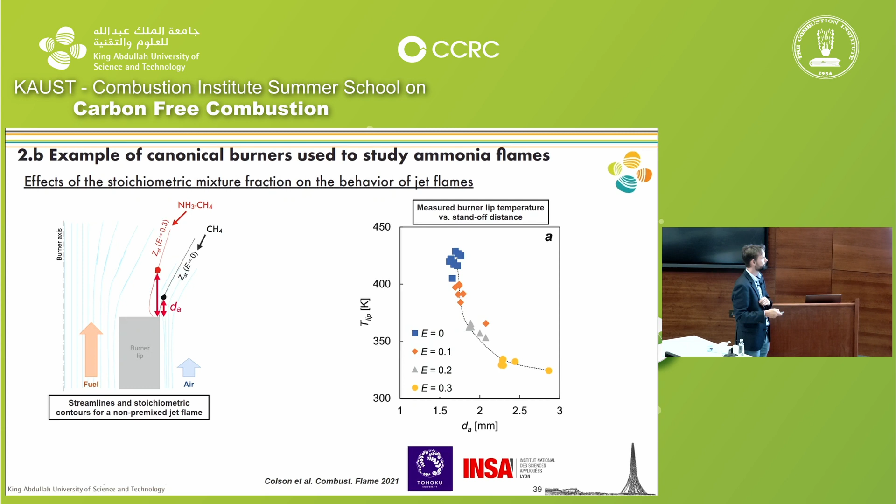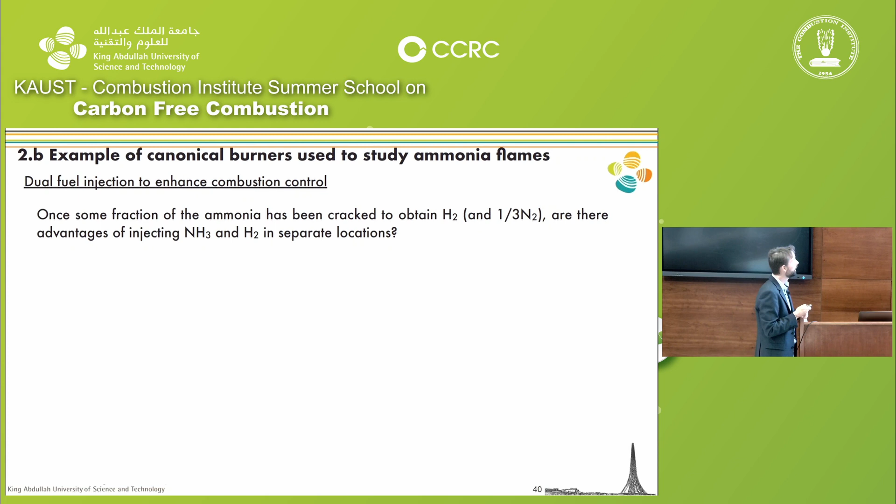All right, next example: dual fuel injection to enhance combustion control. I said before you probably want to partially crack some of the ammonia to introduce hydrogen to be more reactive. Once you've done this, it's probably a good idea to consider maybe not remixing hydrogen and ammonia, and use this opportunity to inject your reactants more cleverly in the burner. And that's what we wanted to try and challenge at KAUST.

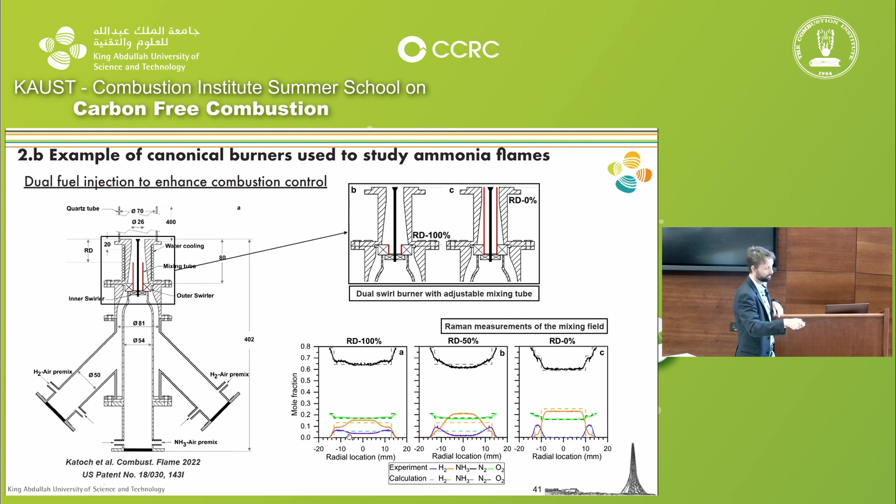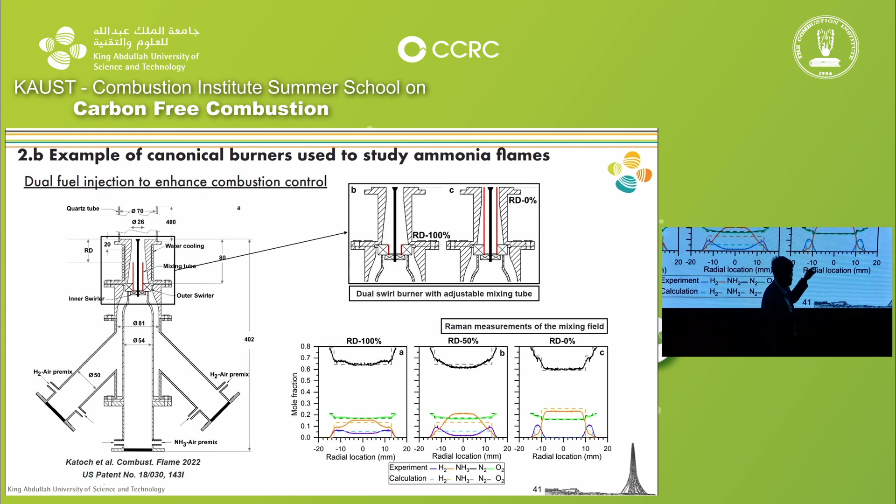Just to highlight that we've measured the stratification using Raman, you see here radial profiles of the different species we measured. The orange is the ammonia. If the fuel tube is fully recessed, this profile is almost flat, kind of homogeneous. This profile, hydrogen in blue, is almost flat too, almost homogeneous. But if you just change the length of your tube, you get a situation where in the center you only find ammonia, and on the edges you only find hydrogen. So you have a homogeneous case and a stratified case.

We wanted to see what's the effect on the flame. We chose an equivalence ratio for ammonia that was slightly rich—this is where you want to be if you don't want to produce too much NOx. For the hydrogen, we chose very lean, also where you want to be to not produce a lot of NOx. And we changed nothing else except the length of the tube.

The specific question we wanted to answer in this study is, can we use this to influence thermoacoustic coupling? The first speaker of the school mentioned this: if you have very powerful turbulent flames, you get acoustic waves in the combustion chamber. If you're not lucky, they resonate with the acoustic modes of your chamber, everything gets amplified, and you can damage your system. So it's probably a good idea to see if we can mitigate these thermoacoustic instabilities.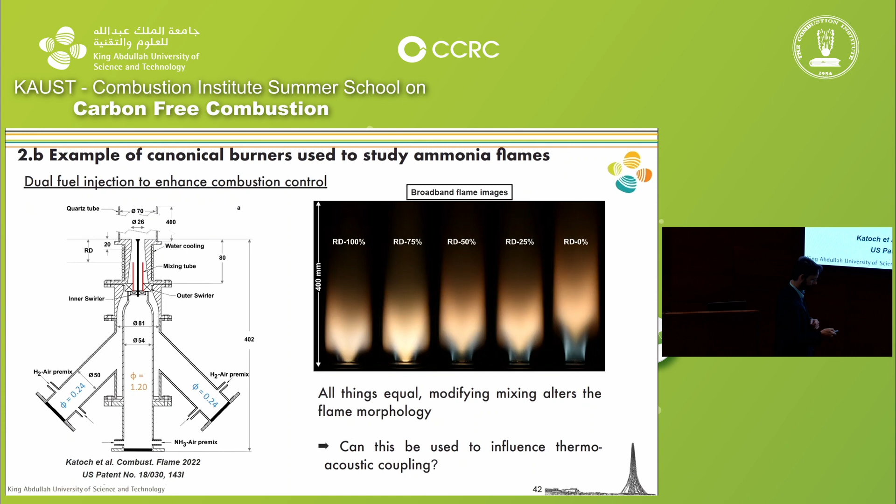Yes, sorry, it's kind of a catalog of studies, but that's kind of by design.

So the next one I want to talk about is the turbulent jet flames we've studied at elevated pressure, specifically to validate combustion models. Again, the first speaker of this school mentioned this: it's becoming so expensive to run actual tests of an actual gas turbine or engine you develop that people rely more and more on numerical simulations. Before you can trust these simulations, they need to be validated, and one way to validate them is to choose target flames where you do simulations and experiments and double check if the simulations are correct.

This is an example of model validation for flames including ammonia, with high turbulence and elevated pressure. We chose these jet flames, labeled 14 and 28. One has 14% of the ammonia being cracked, the other 28%, so there's more hydrogen in that one.

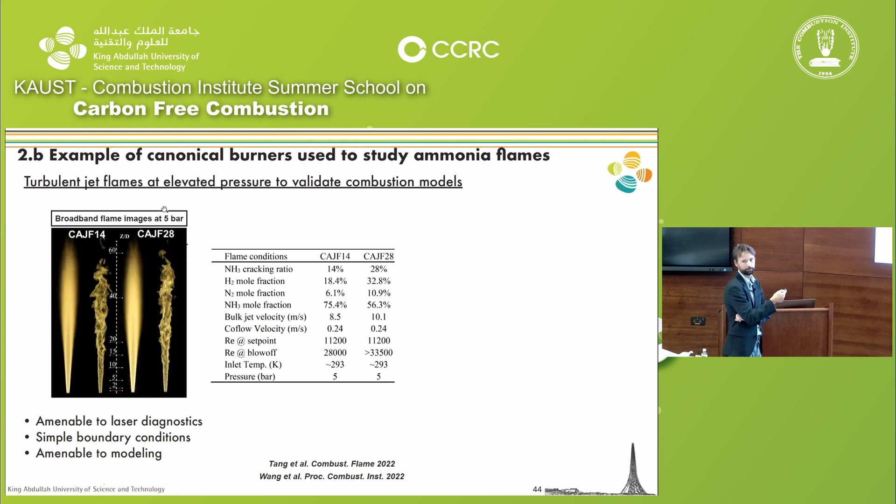We chose to go at 5 bar to replicate the pressure found in micro gas turbines, small-scale gas turbines. To achieve this 5 bar, we had to put this flame in the high-pressure combustion duct we have at KAUST.

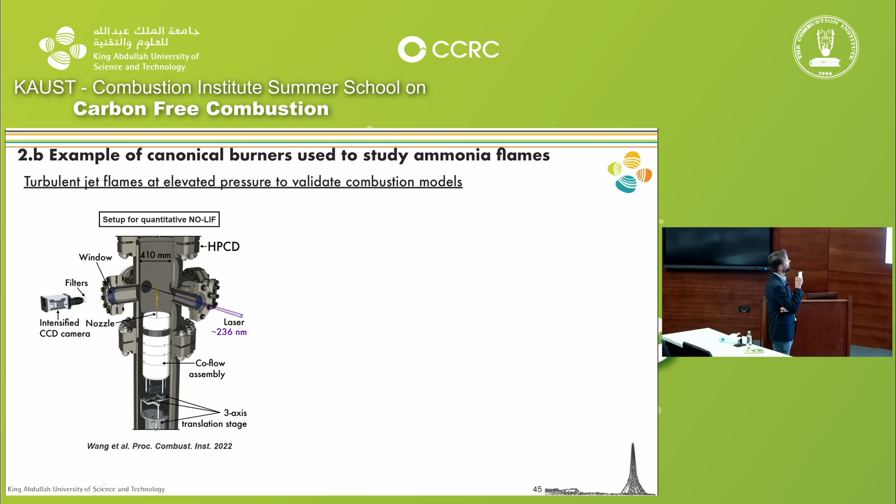To validate the simulation, you need to compare metrics, compare numbers. Different scalars are important when you deal with ammonia. One is NO, so you have to measure NO. We measured NO in this flame using quantitative NO LIF. Gaetano Magnotti is going to talk about it this afternoon, so I won't talk more about this.

You also need to compare, to challenge the simulation based on temperature and major species, which we also measured in the lab using Raman scattering, a very different physical mechanism for diagnostics. Again, Professor Magnotti will talk about it. So we've measured NO quantitatively, major species, and temperature.

We chose this flame because it has very simple boundary conditions, very accessible optically, easy to measure but also easy to simulate, for doing these comparisons between measurement and simulation. Yet they have turbulence and high pressure, so that's very good for model validation.

Some people, for example the group of Professor Hong Im here at KAUST, did simulations of this flame using large eddy simulations. From afar, the predictions look very good, but we have to look really into the details. With this data, we could check the simulations for their predictions of the radial profiles of NO concentration.

Black symbols are the experiments. You have different heights above the nozzle, two columns for the two flames, and the red are the simulations. We see that in terms of numbers and trends, simulations do a pretty good job, which tells you the model as it is today can be trusted for predicting NO in this practical-ish application. But you also learn that close to the nozzle, maybe there's more effort needed because the model isn't perfect there.

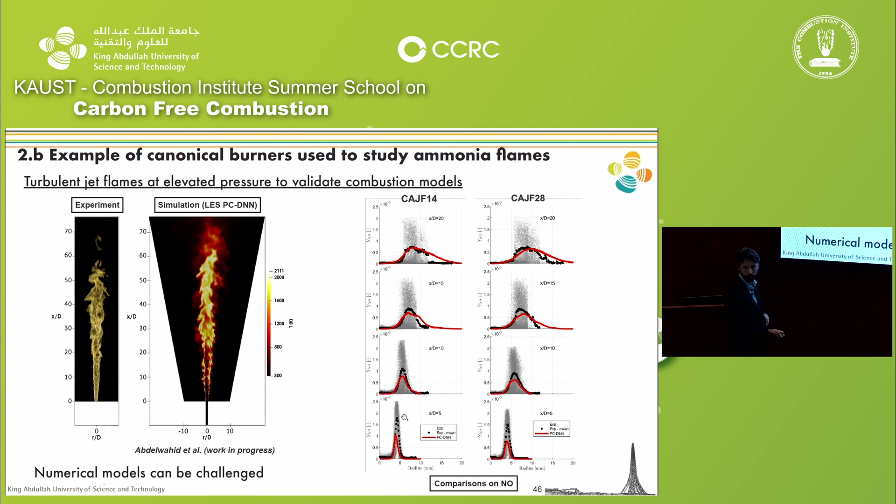They've also looked at temperature and major species in mixture fraction space, not as a function of radius in the field, but as a function of mixture fraction. Mixture fraction 0 means you're in air, 1 means you're in the fuel. If you're in the middle along this blue line, you're at stoichiometric, where the temperature is very high. The black symbols are the measurements.

You have two types of simulations, red and green. The red one uses unity Lewis number, meaning all species diffuse at exactly the same speed, which is the diffusion speed of heat. That's unity Lewis number, equal diffusivity.

But they've also done simulations where each species diffuses at its own speed, called mixture average here. What's interesting is that close to the nozzle, looking at temperature, both models fail, so you'd want a model in between. But far from the nozzle, the simpler equal diffusivity model works well. Yet you can't say that's the best model, because at the same location, looking at hydrogen, it does very badly—you want hydrogen to diffuse at its own speed to get it right.

The learning from this is that modelers now know they need a hybrid model able to weight, average, and balance between these two diffusion models to predict the truth. There was no way for them to know this without access to this data. So numerical treatment of species diffusivity must be improved.

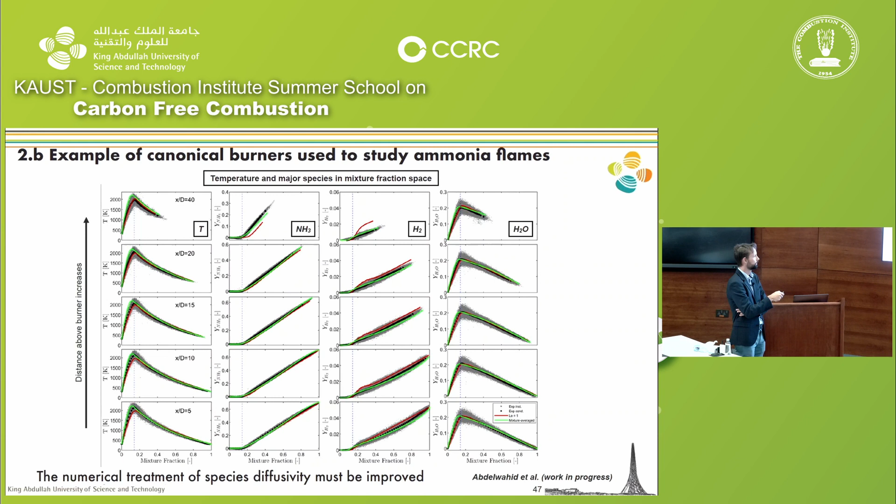And for the final study, I didn't check the time when I started, so I have time. Okay, good.

Again, a study from Lund, where they subjected flames to extreme levels of turbulence. The issue with the flames I've talked about before is that they are turbulent, but you can't have extreme levels of turbulence because if you try to increase the jet velocity, increase the Reynolds number, the flames detach and die.

So they use specific burners, somewhat similar in principle. You still have a high velocity jet of fuel and air in the center, but now it's piloted. They have, around the flame, basically a laminar methane flame that produces hot product that keeps the flame attached, keeps igniting it at the base. They chose to look at two different burners, similar in principle but with different turbulent properties.

Extreme levels of turbulence in the context of this study means very high Karlovitz numbers. The Karlovitz number is the ratio of the chemical timescale to the turbulence timescale. Here, the chemical timescale doesn't change—they are looking at ammonia-air flames at the same equivalence ratio—but as they increase the turbulence intensity, they decrease the turbulence timescale, so they increase the Karlovitz number. That's just one metric to quantify your turbulence.

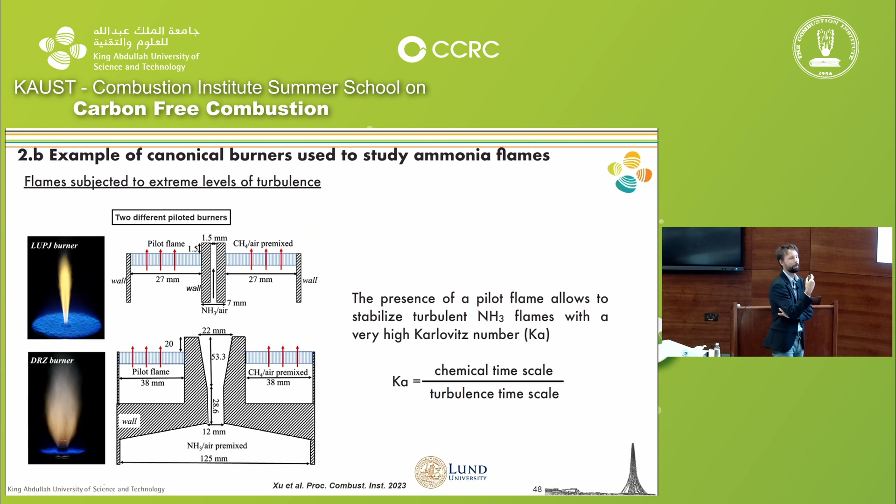The reason this happens is that if the turbulence is intense enough, typically the smallest scales of turbulence become smaller and smaller, and eventually smaller than the width of the reaction layer. So they can go inside, mess with it, and make it thicker. The models are able to predict this.

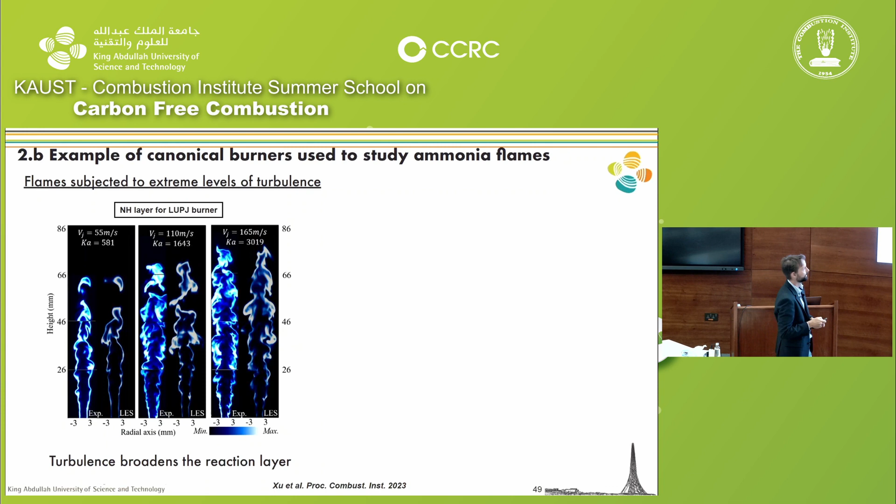But when they tried their different burner—operating on the same principle but with different turbulent properties—they did the exact same thing: increased the turbulence intensity, but did not observe this broadening at all. What they observed instead is more corrugation. You see here the flame is not flat at all—it is very corrugated.

The simulations also predict this. What's happening here is that even though the Karlovitz number is very high, the turbulence is very high, this time it's just because the vortices turn very fast but are not small enough to go inside the reaction zone. They are bigger, so what they do is corrugate the reaction zone. Again, the learning is that their model is very good because it's able to predict both of these regimes very well.

So I've reached the end. We've learned how ammonia's chemistry influences the way the flame looks, and I hope I've shown that it's not only for show—we care about what the flame looks like, and it also influences how we can reveal its structure in the lab. We've reviewed a few examples of purposely built ammonia flames in labs, selected to help us understand more and guide the design of future combustors. I'll stop here. Thank you.

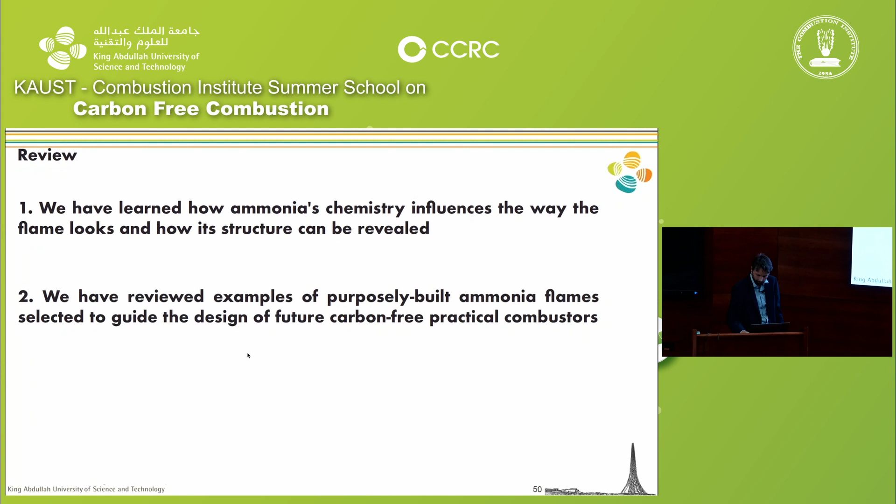That's very interesting. I just have a quick follow-up. So this blowout behavior, is it usually attributed to the chemistry of the fuel, or is it a combination with the physical aspects of the burner as well? Yeah, it's everything—the chemistry of the fuel and the turbulence.

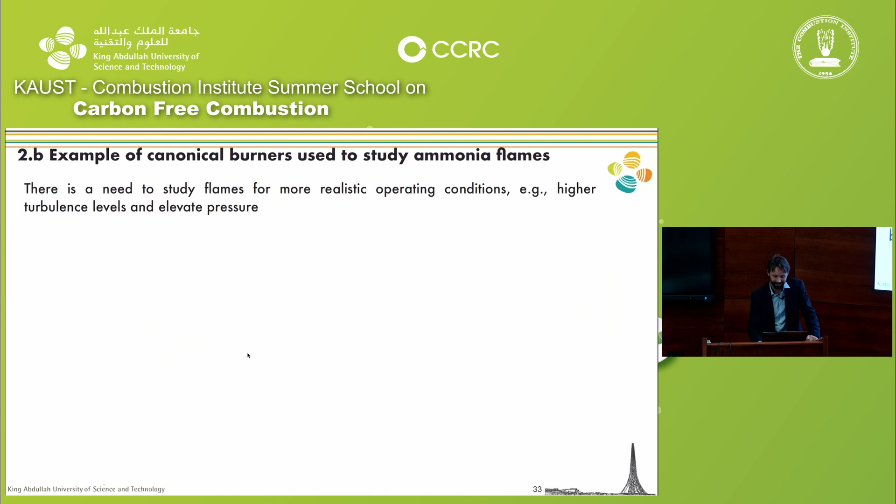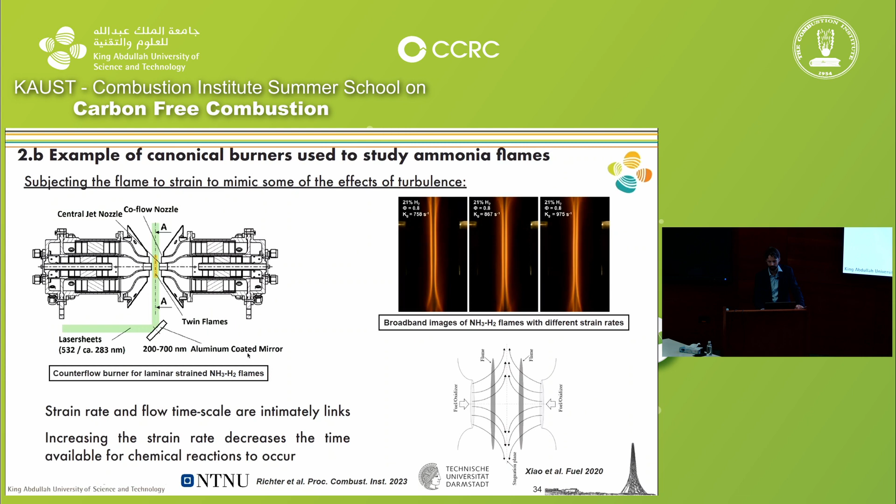...you can extend the velocity at blow-off, or you can decrease the equivalence ratio. Yeah, so I tried, I guess I failed. My attempt to do this was to use this study. In this study, which doesn't have turbulence, they strain the flame. So, but yeah, I know the answer, but you didn't go back to the previous slide. Sure, I just wanted to close the loop for everyone.

So clearly here they show that the ammonia hydrogen flame is more resilient to strain than the methane flame. You can reduce the time available for chemistry, and they still burn. So now we can connect back to the previous study with the bluff body burner, where increasing the turbulence kills the methane flame faster than the ammonia hydrogen flame, and that's for this reason—because the ammonia hydrogen flame is more resilient to having this chemical time reduced, this flow time and chemical time reduced.